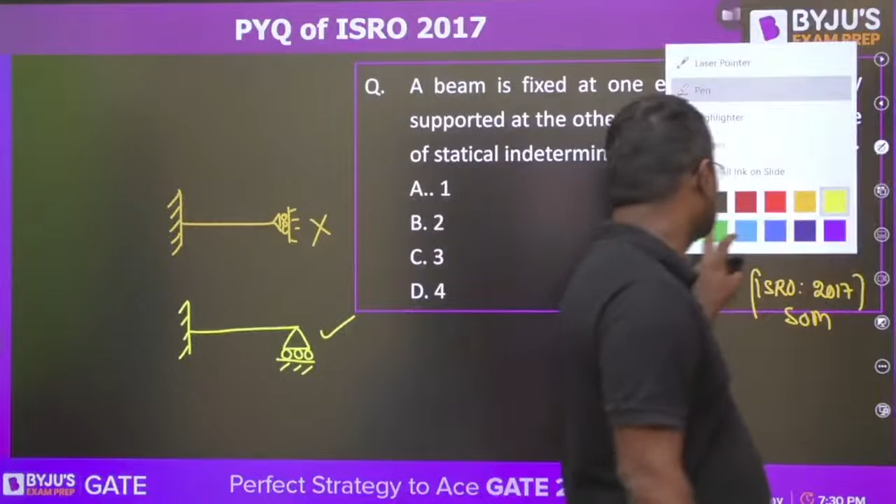So guys, what are the number of reactions here? One reaction is this, vertical. Fixed support can give horizontal and vertical reactions and it can provide moment also. This is vertically supported, so only vertical reaction. So in total there are 4 reactions. And we have 3 equilibrium conditions.

3 equilibrium conditions, that is summation Fx = 0, summation Fy = 0 and summation M = 0. 4 unknowns and 3 equations. बहुत नाइंसाफ है भाई. So it is not good. So we will be having 1 degree of indeterminacy: 4 unknowns and 3 equations.

Suppose there are 5 reactions and 3 conditions, then 2 degrees of indeterminacy. With 3 unknowns and 3 equations, nothing is indeterminate; everything we can determine. So this will be the one.

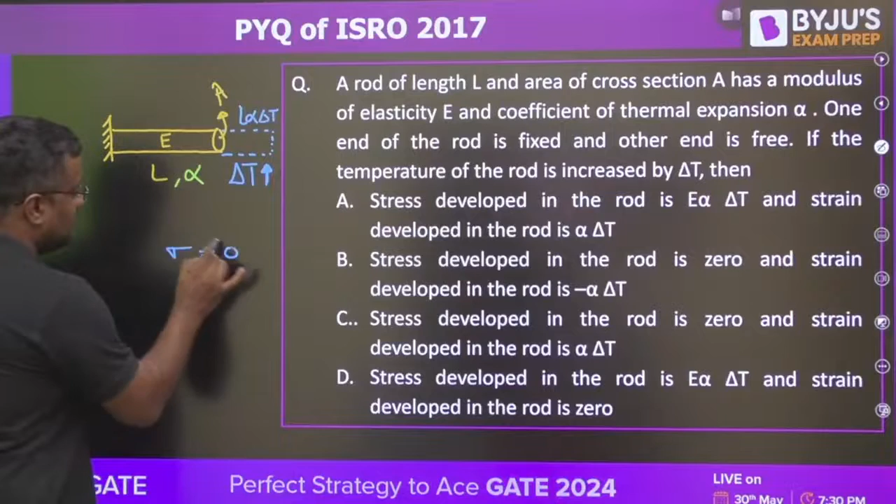Then the length increased is L alpha delta T. So, what will be the stress? Stress will be 0, because there will be no restraint. Nothing is restricting this. If it wants to increase, it can increase. There is no fixed support on the right hand side.

So stress will be 0 and strain will be delta by L. So L alpha delta T by L is equal to alpha delta T. Delta by L is alpha delta T. So stress will be 0 and strain developed is alpha delta T.

Okay. Now I want to show you something very interesting here. Everyone please see. Not this one. Cut it. New slide I want. Okay.

I want to show you something very interesting. I don't know how many of you know this. It can be asked in various examinations. So your screen is divided into 4 parts. One case, second case, third case. You are watching in mobile, laptop or anything, that is divided into 4 parts.

Now, guys, one case is this: sigma is equal to 0, strain is not equal to 0. One case is this: sigma is not equal to 0, strain is equal to 0. One case is sigma not 0, strain not 0. Tell me how many cases you know. If somebody asks this in objective exam or interview, how many of these 4 cases you know?

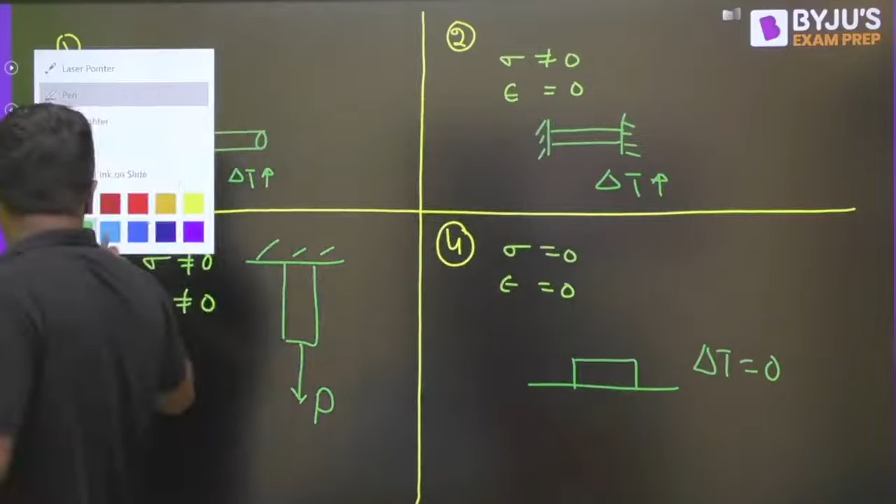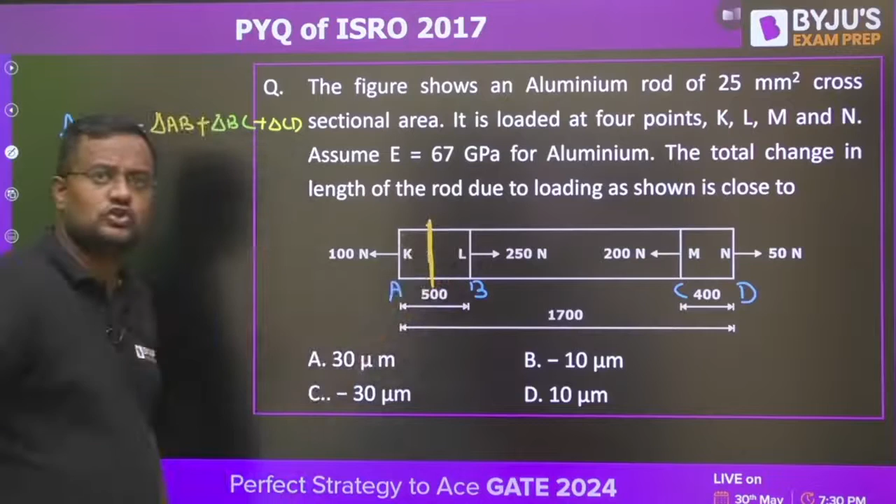Now delta AB, cut a cross section here. See from right or left, your choice. Let us see from left. From left, 100 is going away, so it is tension, it is positive.

From right also, cut a section here. 250 and 50, that's 300, positive, since the section going away is positive. This coming inside is negative. So plus 250 plus 50, because they are going away, plus 300, minus 200, it is again 100. So from left, 100 going away, plus 100, and from right also it is plus 100. So anywhere you see, it is 100 into length 500 upon AE.

Area and Young's modulus are given. I am just going into the concept, not the calculations.

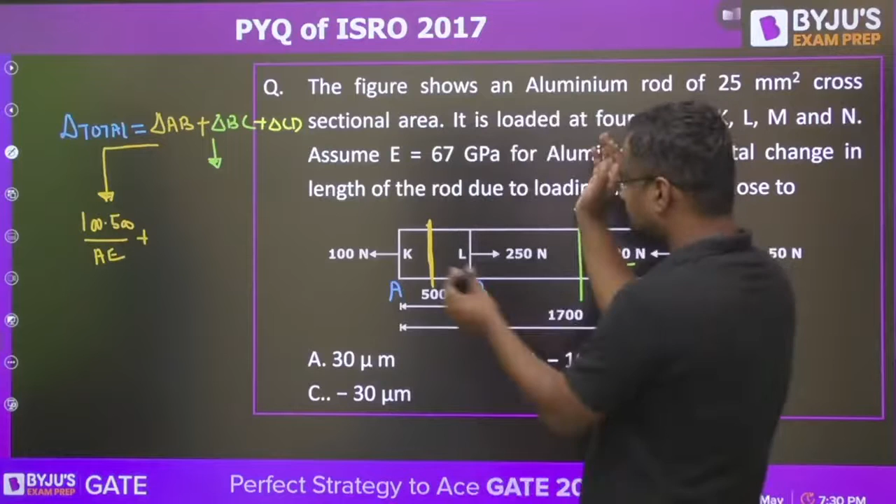Delta BC, cut a section here. See from right or left, your choice. See from right, 50 going away so plus 50, and 200 coming inside is minus. So net is plus 50 minus 200 is minus 150. Now see from left: going away plus, going away plus, coming inside minus. So plus 100 minus 250 from left hand side, plus 100 minus 250 is again minus 150. So delta BC is minus 150, whatever the length, upon AE.

Now delta CD, your choice, see from left or right. Let us see from right, going away, positive, so plus 50. From left also it will be same: going away so plus 100, coming inside so minus, plus 100 and minus 250 is minus 150, going away so plus, minus 150 plus 200 is again plus 50. So either you see from left or right, it will be same. So 50 into, just calculate in proper units, guys, C will be coming.

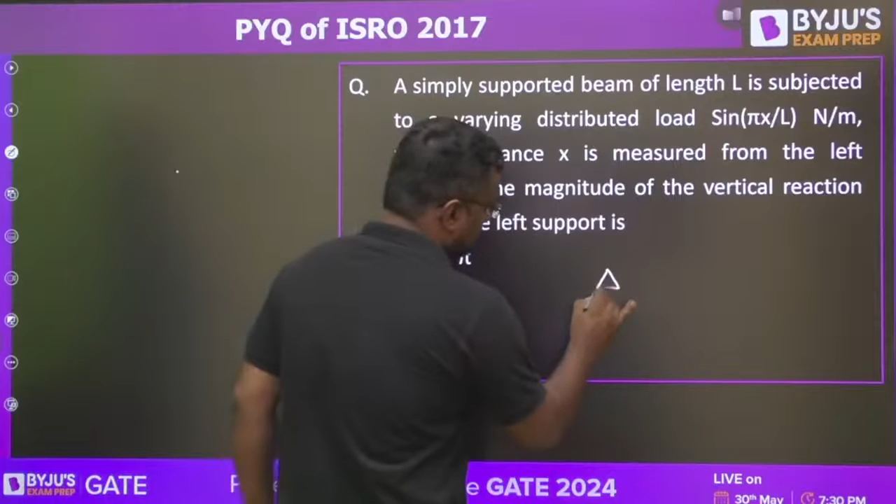What is here: a simply supported beam of length L is like this. Let me again make it. A simply supported beam of length L is like this. Let it be A, let it be B.

Now what is happening here is that the load is not UDL, not UVL, it is sinusoidal load: sin pi x by L. So W is equal to sin pi x by L.

So at x is equal to 0, sin 0 will be 0. So here x I am measuring from here, so x is equal to 0. Now at x is equal to L by 2, so L by 2 means sin pi by 2, which means 1. So it is maximum there.

And 0 to pi by 2 sine is positive, so upward loading, positive; we assume generally upward loading is positive or negative, same now, because only magnitude is in the options. Now at x is equal to L, it will be sin pi, that is 0, and 0 to pi sin is positive, meaning upward loading. Either way the sign convention is correct, because only magnitude is asked.

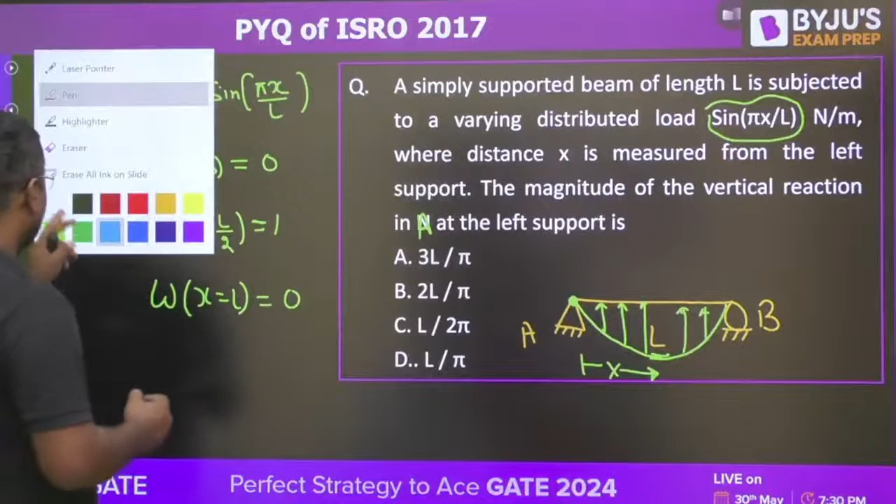Guys, since it is symmetrical, RA plus RB is equal to total load. Since the figure is symmetrical, therefore RA is equal to RB, so I can write RA plus RB as 2RA. So RA is equal to half of total load because it is symmetrical.

And what is total load? Area. So 0 to L, sin pi x by L dx. Okay, from here you can get this, whatever the answer is coming, D or whatever. Got it, everyone?

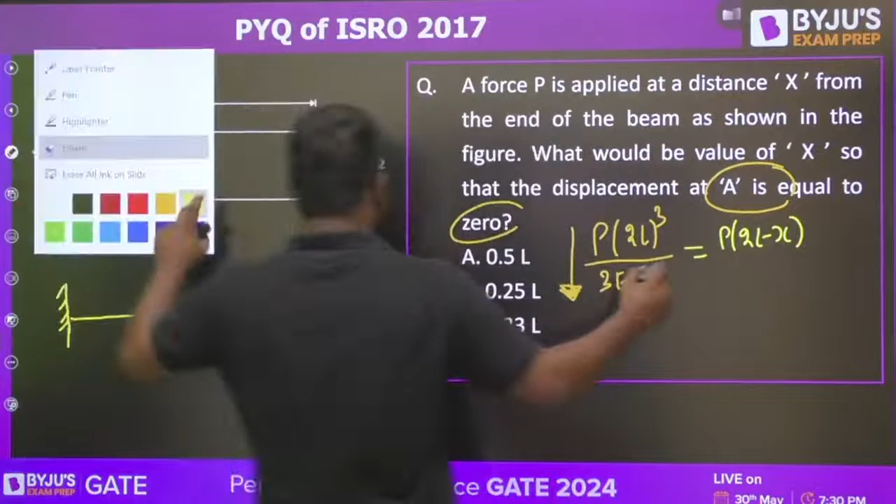This P is pushing it downward by that much, and this moment is pushing it upward. So the downward movement due to orange P and the upward movement due to yellow moment have to be equal. This is P into 2L minus x, M into L square, where L square is 4L square, so it becomes ML square by 2EI, giving 2x whole square by 2EI.

Now from here, this becomes 8P upon 3. EI is cancelled, but L cube is not fully cancelled - L square is cancelled, leaving L remaining.

Here it will be P by 2 into 2L minus x, which is 2L minus x into 2, giving 4L minus 2x. P is cancelled, so we get 16 by 3 into L is equal to 4L minus 2x.

From here, 2x is equal to 4L minus 16L by 3, so 2x is equal to 4L by 3, magnitude wise. So x is equal to 4 by 6, or 2 by 3. Please check if you're getting the same value.

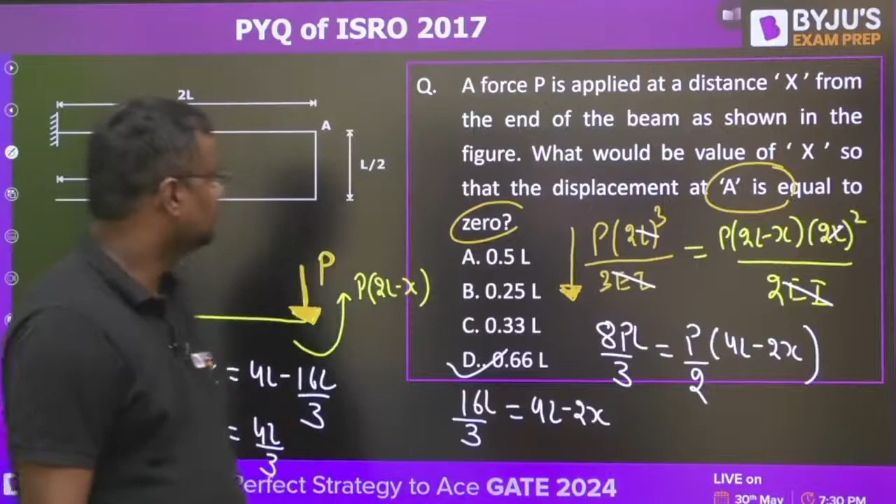Let me tell you that phi A minus phi C is equal to phi A, because phi C is 0 since C is fixed. This is phi AC or phi CA, and phi AC is equal to phi CB plus phi AB. So ultimately, theta A or phi A is equal to phi CB plus phi AB.

For phi CB, cut a section here. See, from right, torque is T. TL, L by 2 upon GIP, where GIP is pi by 32 into D to the power 4, 2D to the power 4, plus phi AB.

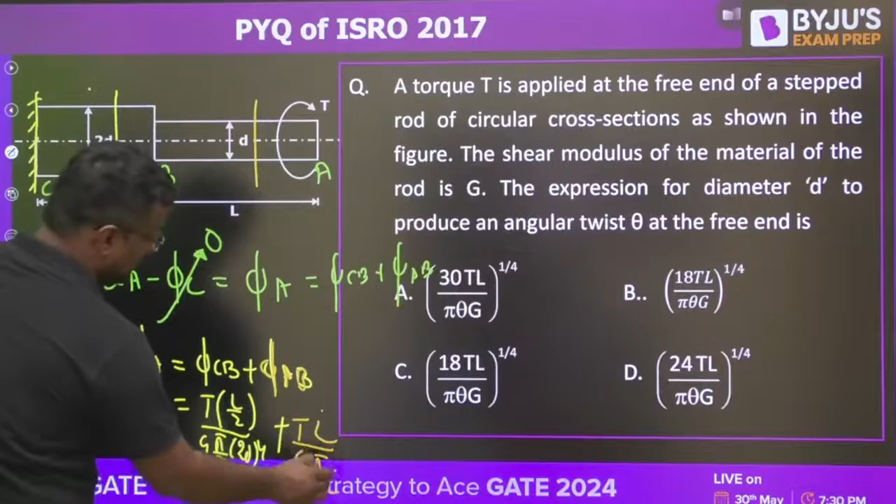Cut a section here. See from right, T, L upon GIP, where IP is pi by 32 into D to the power 4. From here, whatever calculation you do, you can get the answer. Check whether it's B or C, whatever answer comes. Please check, got it everyone?

Diameter is equal to 4 mm. What is the nearest yield stress and percent reduction in area? Percent reduction in area is purely an aptitude problem, so don't be afraid that we haven't studied this in SOM - just apply aptitude also sometimes.

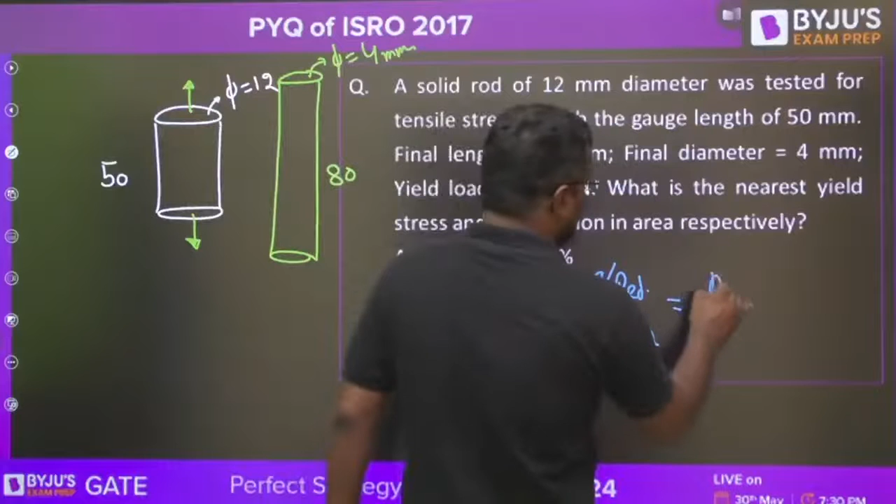So it is pi d square by 4. Earlier it is 12 square by 4 minus pi 4 square by 4 upon pi d square by 4, into 100, and that comes to be 90%. Accurately, if we calculate, it will be 89%.

Now, if I do this, yield stress is force by area, then yield load is 1130 Newton. So 1130 Newton upon area. Unless mentioned, we always work in engineering stress and strain, so it depends on original area: pi d square by 4, with d as 12, giving the area in mm square. Newton per mm square is megapascal, and this value comes to be 9.99, so roughly 10.

So C will be the option.

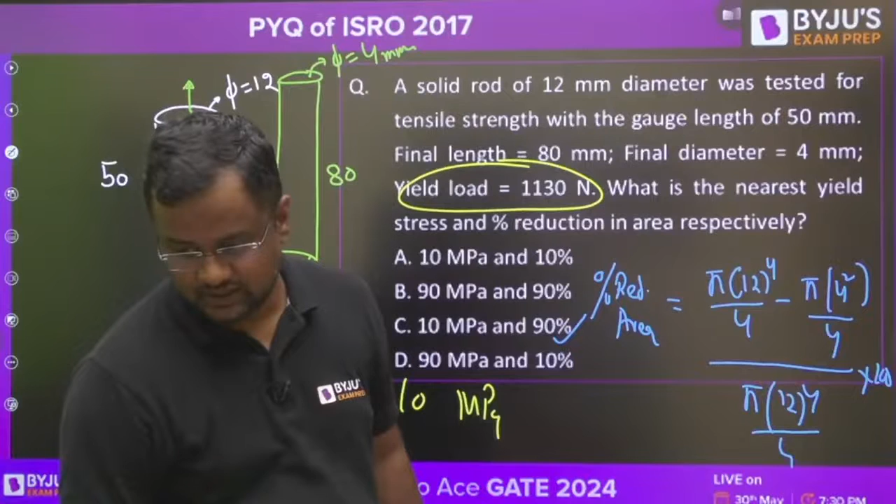Now guys, for perpendicular vectors, dot product is 0. A dot B equals 0 because A dot B is AB cos theta. If theta is 90, it will be 0. So 3 into P, because I will multiply by I, then only cos theta is 1. Otherwise I into J and I into K will be 0.

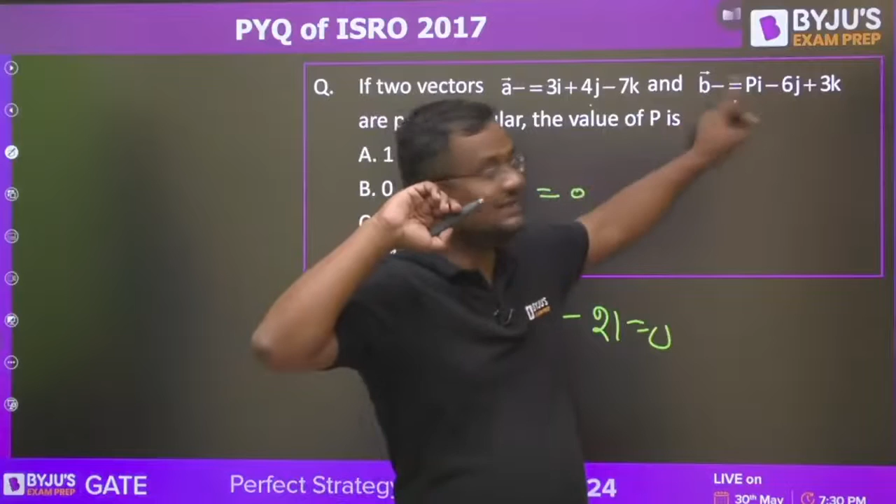I dot J, I dot K will be 0. Now 4J and 6J minus 24. J multiplication with I will be 0, cos 90 is 0, J multiplication with K is 0. Now K term is equal to 0. Again K will multiply only with 3, since K dot I is 0 and K dot J is also 0. So this gives 3P equal to 45, so P equal to 15.

So for the vectors to be perpendicular, the value of P has to be 15. For the dot product to be 0, it should be 15.

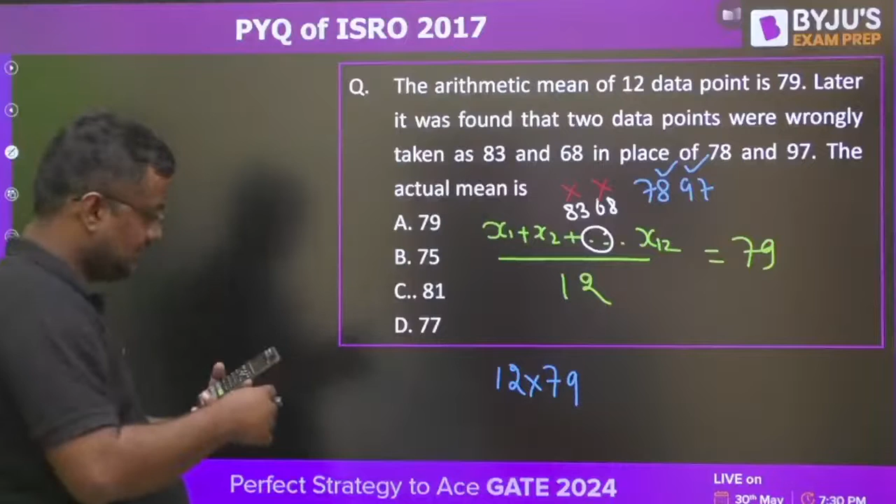But actually you have to subtract 83 and 68 from here, because that is not the actual sum, and instead you have to add 78 plus 97. Again there are 12 terms, so for 12 terms, we subtract 2 wrong terms and add 2 correct terms, then divide by 12 to get the average.

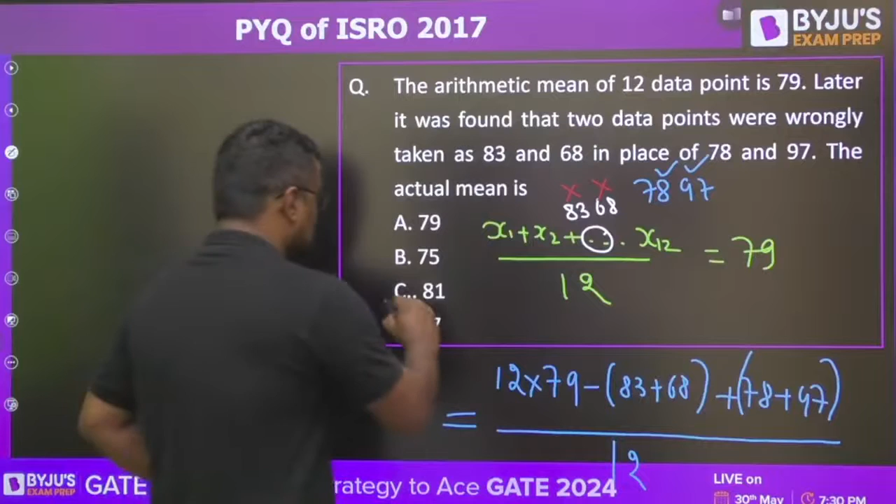Now let us see from my new calculator what is the value: 12 into 79, minus 83, minus 68, plus 78, plus 97, divided by 12, equals 81. So the C option is coming.

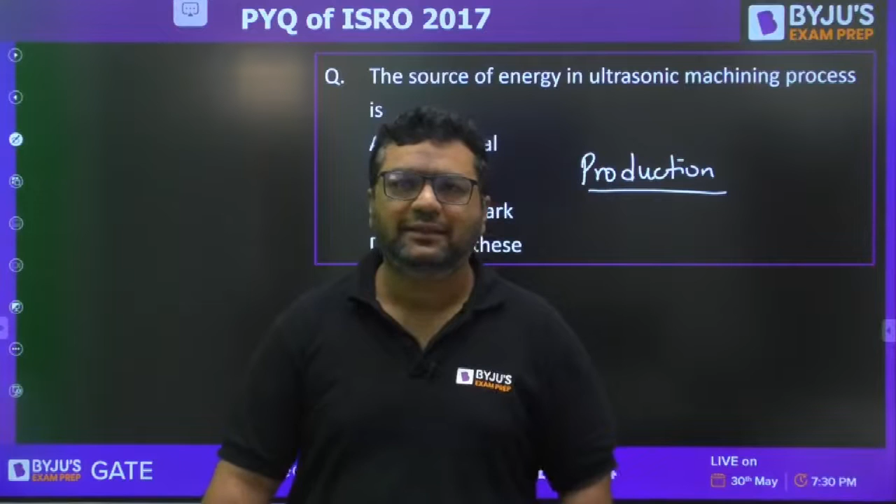Yes, everyone has given the right answer this time. Sanjay is saying A because whenever we are talking about USM, ultrasonic machining, a non-traditional machining method, we are going to use the energy of vibrations. So whenever we are going to use the vibrational energy, the answer will be mechanical. Is it clear? Very good, Payal, Sanjay. So moving to the next question, guys.

This is from theory of machines. Degree of freedom of spherical pair. Guys, this is a question where many people are giving the wrong explanation by showing you some wrong experiments. Don't go by that. They are trying to show spherical pair as rolling pair. It is wrong. Okay, so don't be part of such sessions. Okay, the answer will be 3.

Because in spherical pair, clearly you are having 3 directional rotation. I have always given you the example of this. 1st rotation, 2nd rotation, 3rd rotation. So the answer will be C. For spherical pair, we are having 3 dimensional rotation. So degree of freedom will be 3. Very good, guys. Moving further to the next question.

Actually, this is not from any subject. This is from engineering drawing. But sometimes ISRO asks some 3 to 4 questions which are beyond your mechanical syllabus, and they also mention that 75% of the paper will be from your branch, the rest 25% they can ask from here and there. Okay, so they are asking about the isometric projection of a sphere.

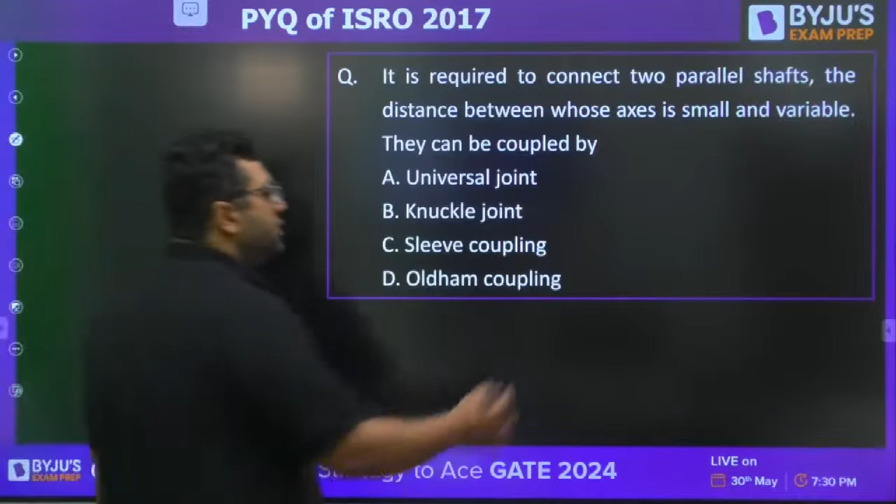So the answer for this is going to be parabola or hyperbola or ellipse or circle. Circle, yes. When you see the projection of a sphere, it would be a circle with a diameter equal to the sphere diameter. Very good, guys. Moving further, now we are having a question from machine design, or you can also call it TOM. Why? You will get to know after answering this. These are all ISRO PYQs. Very easy question they are asking.

Great, great. Jabir, if possible, connect with me after the class. Okay, connect with me after the class.

Sanjay is saying D is the answer. It is required to connect 2 parallel shafts, the distance between whose axes is small and variable. So I feel they are saying that if one axis of the shaft is this, the other is this, there is an offset between them. And this offset is said to be lateral misalignment. So if lateral misalignment is there, then my dear, we will say the answer is going to be Oldham coupling. Because Oldham coupling is used to join shafts with lateral misalignment.

Now you must be aware of others. When we are talking about the universal joint, it is used for angular misalignment. For angular misalignment, okay? And when we are talking about the sleeve coupling, it is similar to flange coupling to join the coaxial shaft. Okay? Is it clear? Yes, knuckle joint is used to join 2 members under the tensile forces. So answer will be D for this. So it is from theory of machine or machine design.

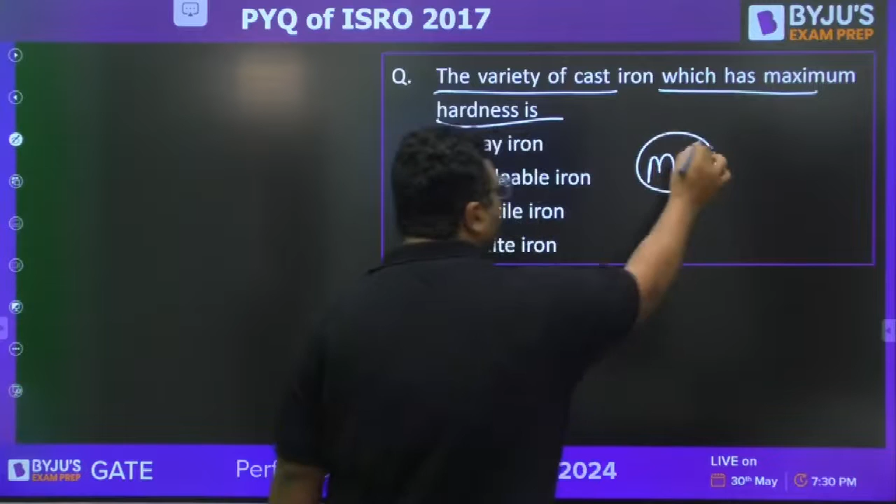Now they are talking about the variety of cast iron which has maximum hardness. This is from material science, ESE paper 1 part, where we study all the grades of cast iron. Yes, Sanjay is saying D. Very good. Sanjay is very well prepared for the exam. Very good, Payal. Answer is white iron.

Actually, whenever we are talking about the white iron and the gray iron, in the gray iron we are having the graphite flakes present. So guys, whenever we are talking about the white iron, it will be having the most hardness because it will be having the carbon present in the hard form. So that's why answer will be D for this.

Now once again, theory of machines, my dear, Kutzbach equation. I feel very easy for all of you. So you can see the question level is not at all difficult. That's why at that time they were giving you 80 questions in 90 minutes, a 1.5 hour paper. This time the pattern is going to change. So after PYQs, we will be coming up with the mock test, and mock test will be according to the exam level. So be ready for that.

Very good. Sanjay is saying C. So you know that degree of freedom by Kutzbach equation is 3(L minus 1) minus 2J minus H. So according to that, C option is correct. Okay, very good, Sanjay. C option will be correct. Very good, Payal.

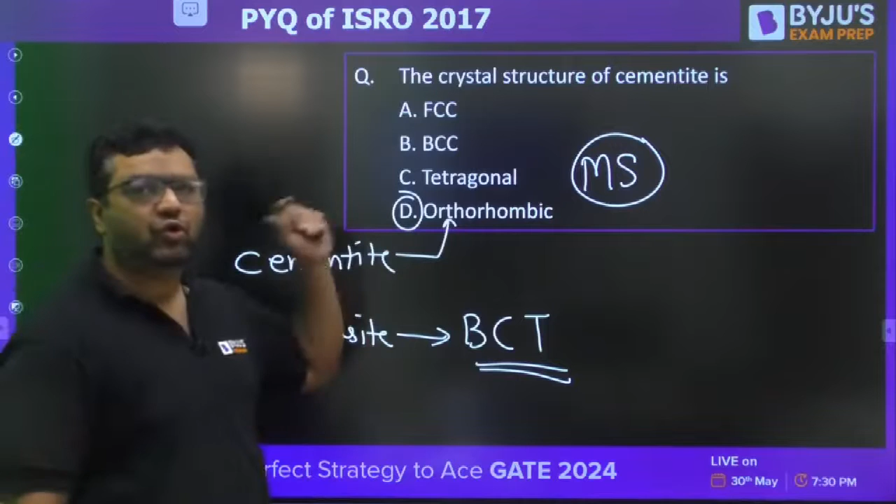Here I would like to say there is a confusion between two words for students: cementite, martensite. When we are talking about the cementite, no doubt this structure is orthorhombic. And for martensite, it is body centered tetragonal. So martensite is having BCT structure, cementite is orthorhombic. Why am I telling both? Because maybe in the next paper they ask the second one. So be ready for that. Moving to the next question, guys.

This is once again from the material science heat treatment process. You can see the weightage of material science is more than production technology in this ISRO paper. That happens only in two papers, ISRO and engineering services. In all other papers, material science weightage is very less in general. That's why I say ISRO follows the pattern of ESE.

Okay. So Sanjay is saying D is the answer. So yes, in terms of hardness, furnace cooling gives you the least hardness. Then you will get in air, then in oil, and then in water. So water quenching will give you the highest hardness. D is the right answer for this.

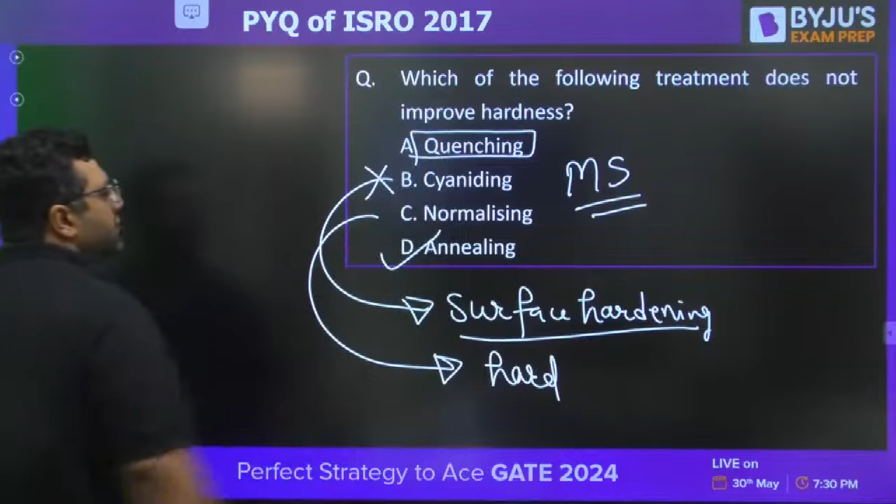In annealing, we improve properties like ductility, toughness, and stress relieving. That's why in annealing, hardness is not improved. Because hardness and brittleness go together. Strength and ductility go together. So here ductility is increased, toughness is increased, hardness is decreased. Moving to the next question.

Now, theory of machines, governors. They're asking you the ratio of the height. So, height in which governor? Porter. To the height in what? Here, small m is the mass of fly ball, capital M is the mass of sleeve. What would be the answer, guys? Sanjay is saying C, Pagelward is saying C.

Why are other students not answering? Other students are just watching the session. Answer it. You can give a wrong answer, but you must answer it.

So I would like to say the answer is going to be C. Because you know in the Porter governor, you are having this term, M plus m divided by m, like that. And in the Watt governor, you are having 895 by N square. And in the bracket, you are having this type of term. So that is why here there is no term of mass. Here only the mass terms are there.

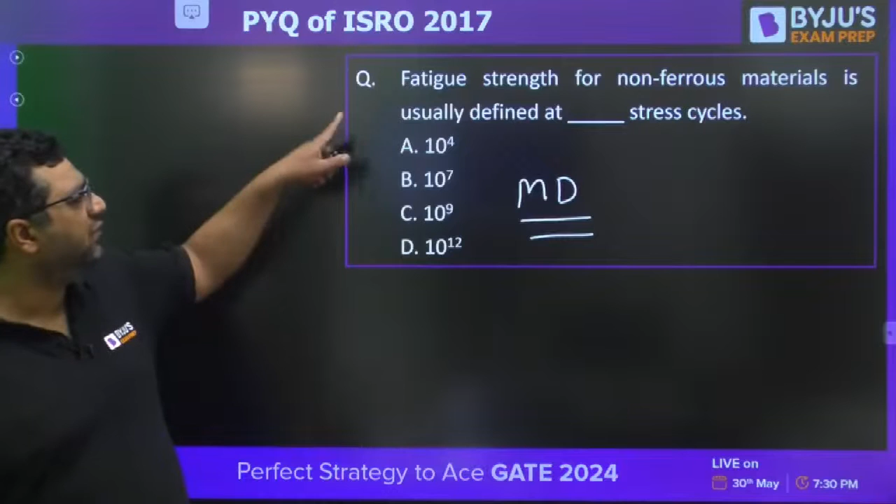Fatigue loading case. They're asking you the fatigue strength for non-ferrous material is usually defined at how many stress cycles. So what would be the answer? If you remember, for mild steel, I have shown you, we make it like this. This is for mild steel. This is for aluminium, copper, magnesium. But they are asking up to which value on the x-axis it goes for non-ferrous material.

Sanjay is saying B, Jahid is saying B, Pagelward is saying C. My answer is B. For non-ferrous material, always remember it goes till 10 to the power 7. For mild steel, it goes till 10 to the power 6. Okay, moving further guys.

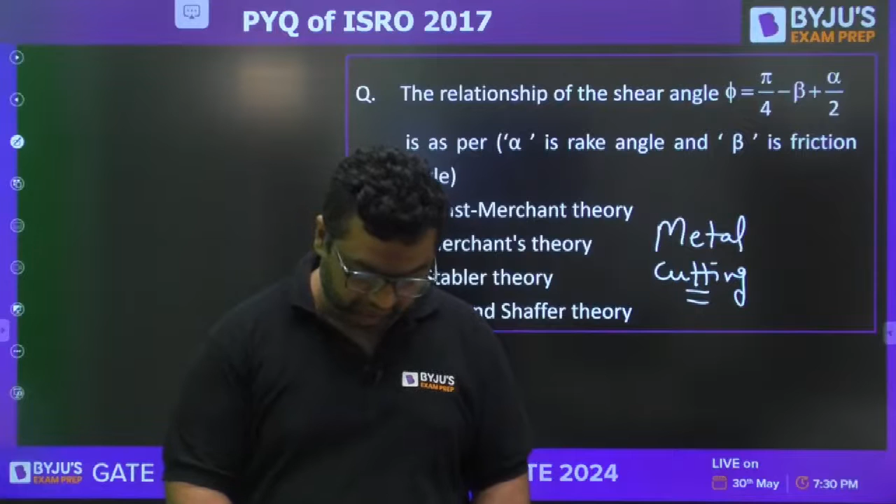So this is from production, metal cutting. Try to solve it. What would be the answer here? Very good. Sanjay is saying C. Ashish is saying D.

Lee and Shaffer theory. So dear, I would like to say that 2 phi plus beta minus alpha is pi by 2. Here they are asking what is the relation. So when you find out phi, it will be pi by 4 minus beta by 2 plus alpha by 2. This is from Ernst Merchant theory. So if this relation is used, then the answer will be this.

When we are talking about the Stabler theory, for Stabler theory, we are going to have phi plus beta minus alpha by 2 is equal to pi by 4. This is the Stabler relation. From here you can write phi is equal to pi by 4 minus beta plus alpha by 2. So the answer for that is the Stabler theory. C is the right answer.

Okay. So I feel everybody got it. Dinesh, very good Dinesh. Moving further guys, next question. I am telling you this is also a very important question. It is repeated at least 5 times in ISRO. Only the difference is sometimes they put the theory name here and ask the relation in the option. So always remember these three: Merchant, Stabler, Lee and Shaffer. Remember these relations.

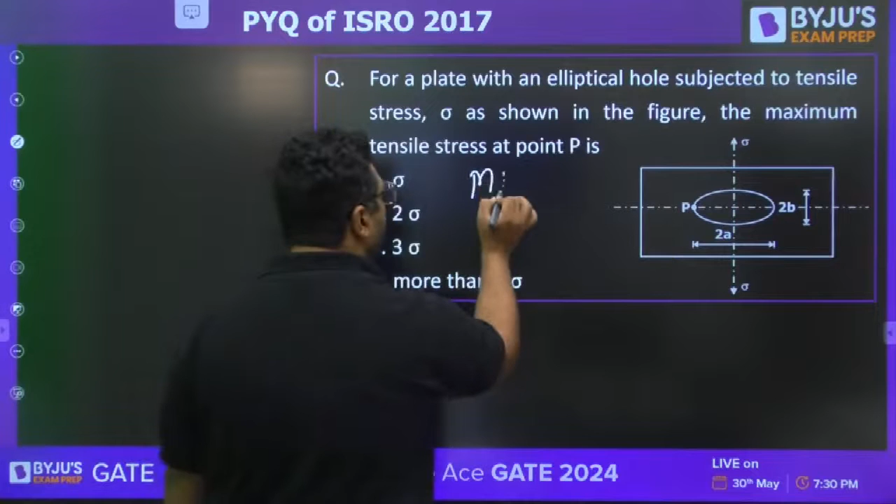Okay, moving further guys. This is once again from the machine design fatigue loading chapter. In this paper, weightage of machine design was quite high. If we have seen the previous 2 papers, which were recent, their machine design weightage was lesser. But if you see, the topics are fixed, they're asking on similar topics every year. They're not changing the topic.

Okay, solve this question. For a plate with an elliptical hole subjected to tensile stress sigma as shown in the figure, the maximum tensile stress at point P is. This is the point P they have marked. What would be the answer for this? Okay, Sanjay is saying 3 sigma. What about others?

So I feel everybody knows that for an elliptical hole, with loading applied in this direction, we can write KT is 1 plus 2A by B. Is it clear? Can you tell me 2A or 2B, which one is bigger from the figure? Can you identify? Sanjay, Dinesh, Jahid, Ashish?

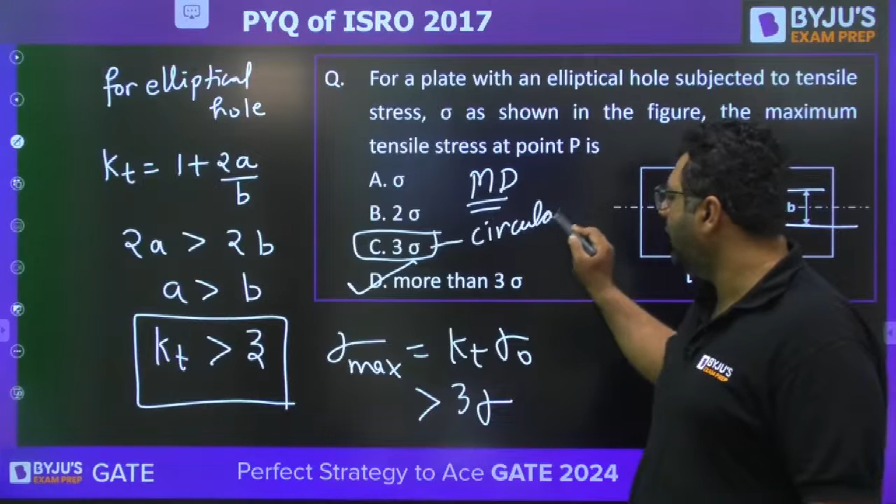And I know that generally students will say 3 sigma, but 3 sigma is coming for the circular hole. So the answer for this is D. I feel this is the only question till now which you guys have given wrong. None of you have given the right answer. For all other questions someone was giving the right answer, most probably Sanjay.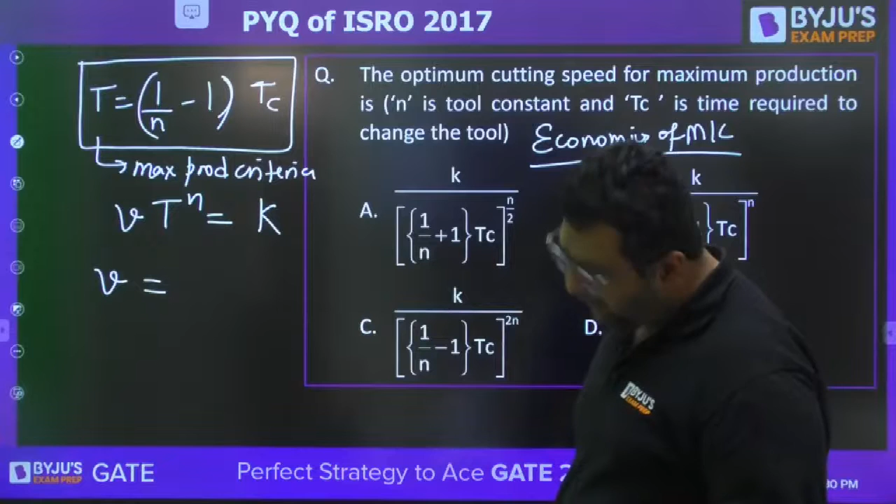So you know V T to the power n is equal to K. So you need to answer what is the value of the optimum cutting speed. What is the value of V? This is for maximum production criteria. Sanjay has said B. What about others? You can write it as K by T to the power n, that is K by (1 by n minus 1 into Tc) to the power n.

So the answer for this is no doubt B. B is the right answer. So you need to remember these relations. This is for maximum production criteria. Similarly, there was a relation for minimum cost criteria. Fine. Moving further, this is from tool signature.

Tool signature. You need to tell about the side relief angle. I feel everybody knows that rake, relief and cutting edge: I told you angles come in this sequence, and always remember side comes later. So first there would be two rake angles, back rake, side rake, then end relief, side relief, then end cutting edge, side cutting edge. So the answer for this is the side relief angle.

So side relief angle, what will be the answer? Very good, Jahid. It is going to be the fourth term. This is first, second, third, fourth, fifth, sixth. Fourth term is this. And also you can see the second last term is less than 30. So it is ASA. If it is more than 30, do you remember that now? Yes, it is ASA, American Standard Association.

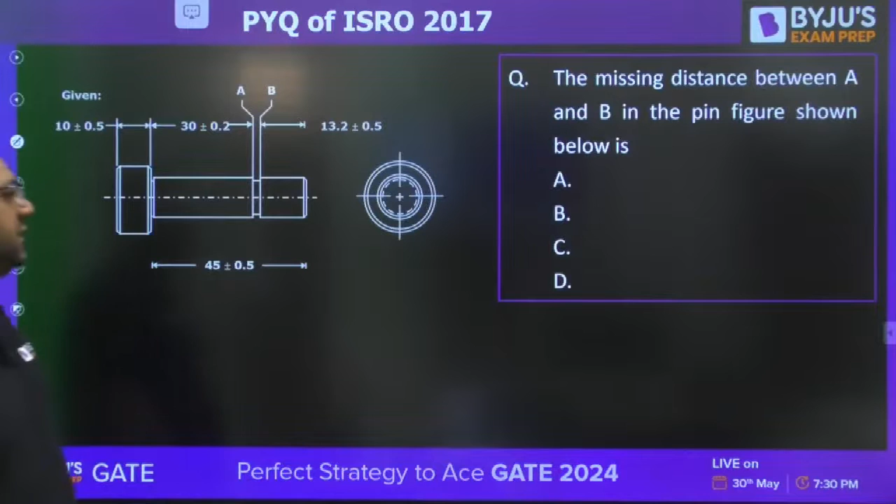Moving further, guys. For this question, actually the options are missing, so I am writing them. This is from metrology, limits, fits and tolerance. Option A is 1.8. Option B is 1.8 plus minus 1.1. Option C is 1.8 plus minus 1.2. Option D is 1.8 plus minus 1.3.

This is a question from tolerance sink. Okay, you would be remembering that tolerance sink concept.

So let us see, sir, from where should we prepare for the allied subject? Ram Yadav, whenever they say allied subject, it is very difficult for you guys to identify separately. But I am telling you, for that you need to prepare RAC, IC engine, and power plant as per the ESE syllabus. It will cover 3 branches of allied subjects, and you can have some basic ideas about automobiles. But if you prepare IC engine, RAC, and power plant as per the ESE syllabus, out of 25% of allied subject questions, 20% will be covered here. For the rest 5%, there is no limit — they can ask from automobiles, engineering design, engineering drawing, okay? Allied means nearby areas.

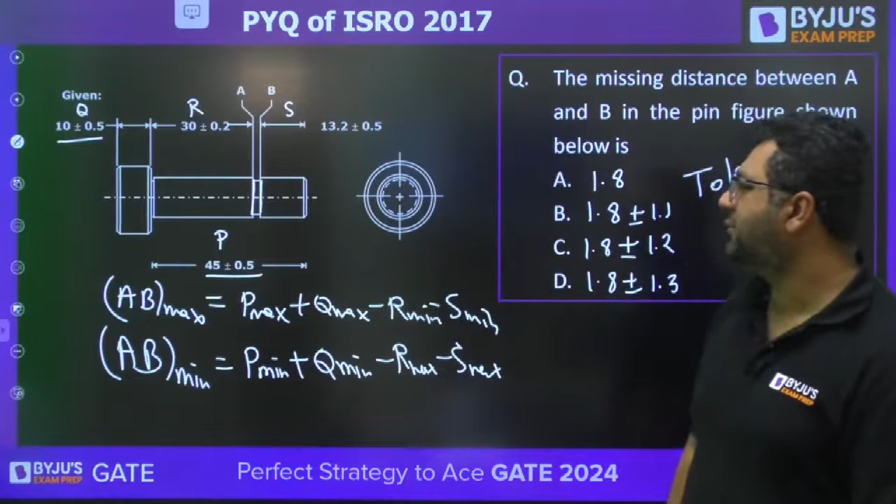What will be the answer, guys? So when we say P maximum, 45.5, Q maximum 10.5, then minus 28.8, 29.8, and 13 will become 12.7. So you can find out these two sizes, that will give you the right answer.

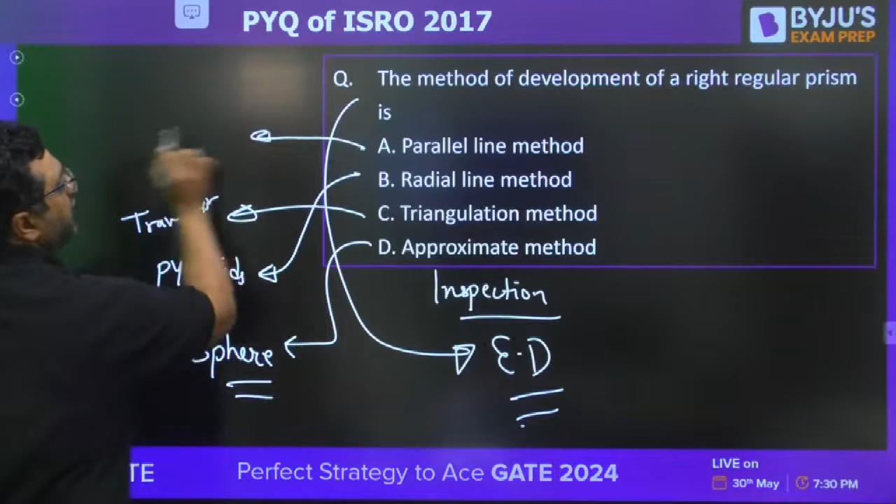So radial line method is used for making pyramids. Triangulation method is used for transition pieces. Parallel line method is used for right regular prisms. I just told you this because if it is repeated, you must be in a position to answer it. So the answer for this is A.

Otherwise, no need to refer to anything for these questions. No one will be knowing that. Okay? No one will be knowing that.

This is from welding now — actually no, material science. Below the ductile to brittle transition temperature, weld joints show... this is about ductile to brittle transition.

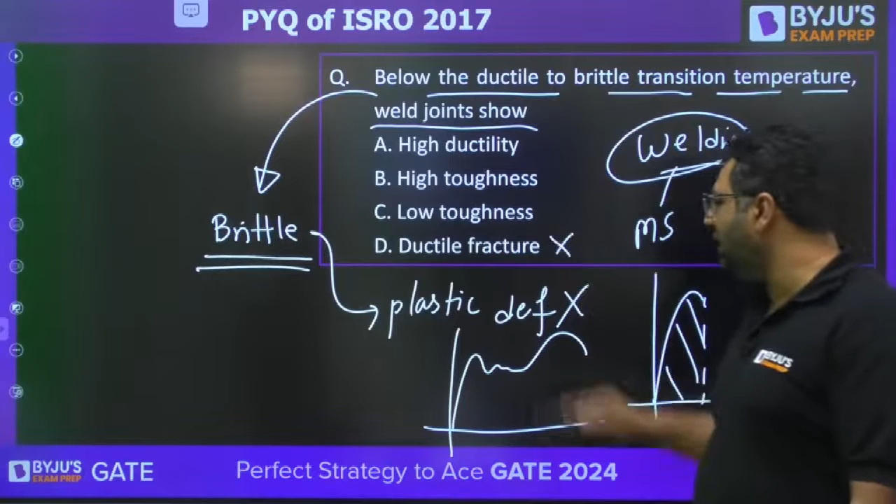I would like to say that below this material is brittle. Now you can answer which property it will have. Okay, Sanjay is saying C, very good, because whenever a material is brittle, it will not show any plastic deformation. So when plastic deformation is not there, the stress strain diagram for mild steel comes like this, whereas for other steels it comes like this. So obviously the area will be lesser, so no ductile fracture, no high toughness, no high ductility. Answer will be low toughness. C will be the right answer for this question, guys.

Okay, moving further guys to the next question. This is from casting, non-conventional casting process. I feel after that I will be taking 7-8 more questions. Then Chandra sir would be coming for thermal and fluid part, then Suraj sir would be coming for engineering mechanics, industrial engineering and heat transfer.

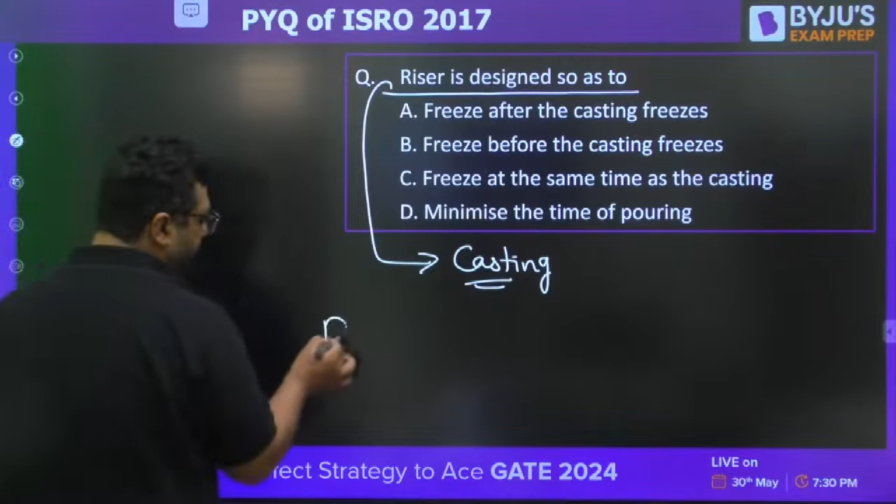Today you got late. Riser is designed so as to... question from casting. Sanjay, Arnab, Jahid, Pejal, Ashish is saying A. So when we are talking about the riser, riser is there to provide the molten metal for the first two stages of shrinkages. So first stage is liquid shrinkage, other is solidification shrinkage. So if it will solidify before casting, it will not be able to provide molten metal. That's why riser must solidify after the casting. So Sanjay, Dinesh, Arnab, Ashish and Sanjay have given the right answer. A will be the right answer. Freeze after the casting freezes.

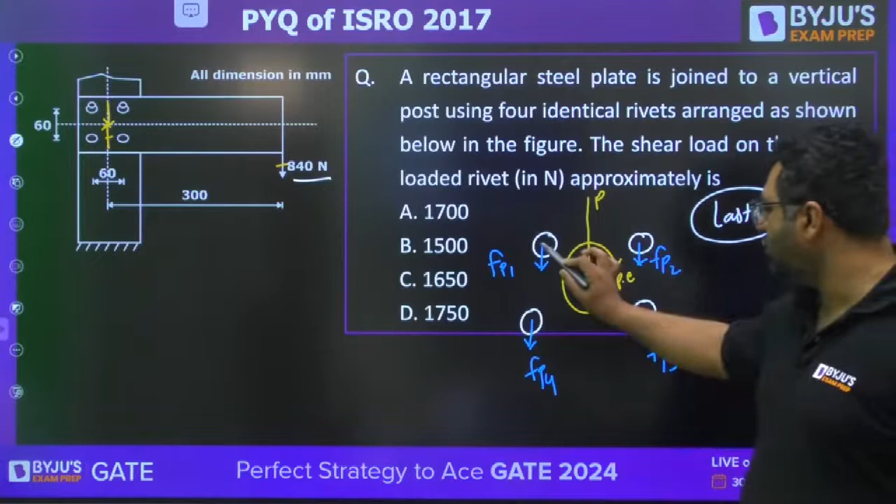Then secondary force will be coming out like this. To find out secondary force, I feel you have the idea how to do this. For secondary force, I am doing it directly because in ISRO only those candidates are appearing who have given GATE, so you already are aware of how to do the things. It is P into E into R, with R1 square, R2 square, R3 square, R4 square. Because of symmetry, all these four are equal, so you will be getting the value of secondary forces.

All secondary forces will come equal, and if you want the values, primary force is 210 Newton in every nut and bolt. Secondary force will be coming 1484 — always the couple gives more effect. Then you will find out the resultant. For the resultant, you need to find the angle between these two. In these two rivets or bolts, they are near to the load, that's why they will be the critically loaded rivets.

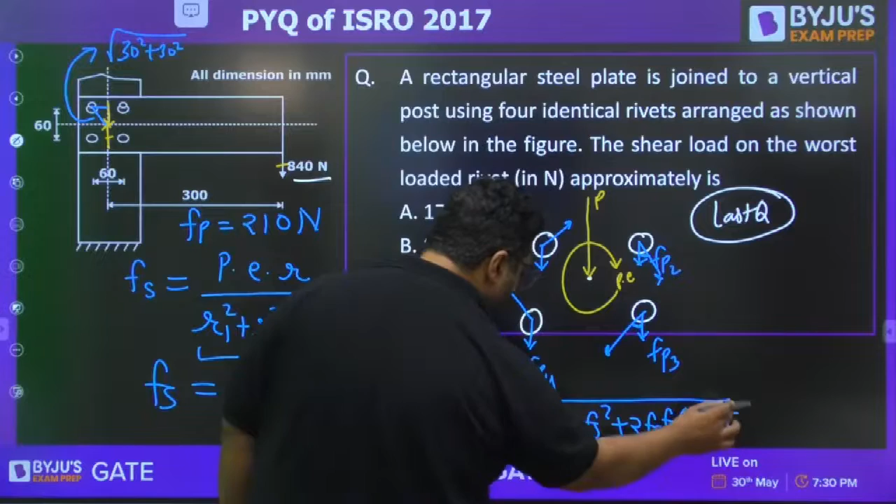Okay, very good Sanjay, the primary value of 210 is correct. Is the secondary value correct? Have you checked this? This distance is 60, and this is also 60, so when you find out this distance, it is going to be by Pythagoras: 30 square plus 30 square. The angle will be 45. So it is F primary square plus F secondary square plus 2 times F primary times F secondary cos 45. Solving this, you will get the resultant force coming out to be 1648.

So this was a lengthy question. This type of question you must attempt at the last. They are asking you the shear load on the worst loaded rivet, so I feel the answer for this is near to 1650. C will be the right answer. Everybody got it? Please tell me that.

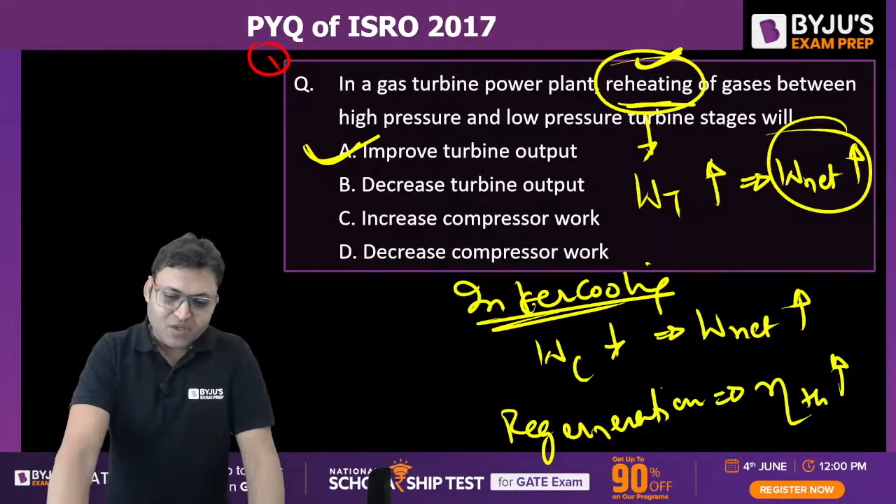Is this all fine? Yes, Ashish, Sanjay, well done. What about others? Why are you guys not responding? Jahid, Arnab, even if you commit a mistake, it is not a crime, but you should be ready to accept your mistakes and try to work upon those weak areas. That is how improvement happens. It is a gradual process. So do not feel disappointed even if you are not getting the right answer. We are there to help you out in every possible way.

If you draw a psychrometric chart, the process is cooling and dehumidification. Can we call it cooling plus dehumidification? The process is cooling and dehumidification. So if we draw the psychrometric chart, on the y-axis is specific humidity, on the x-axis there is dry bulb temperature. Cooling means temperature decreases and dehumidification means specific humidity will also decrease.

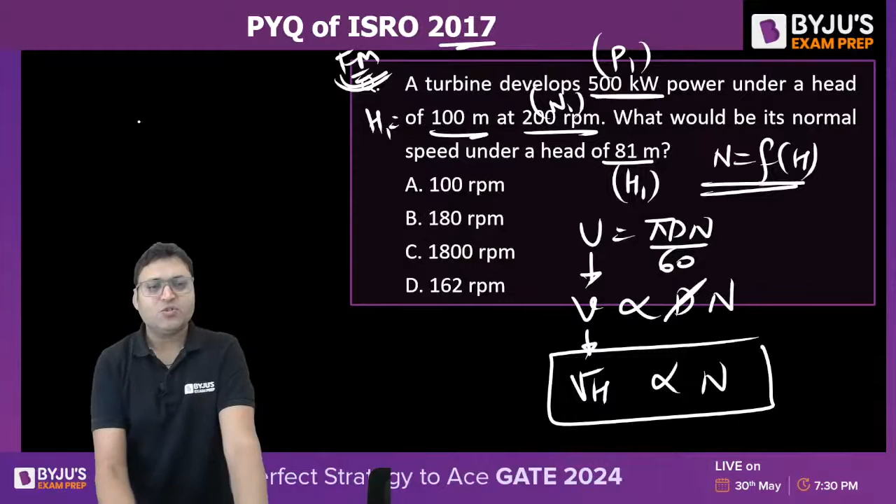So we can say U is equal to pi DN by 60, the blade speed, and U is directly proportional to D into N. D is constant, and V is proportional to root H, which is directly proportional to N. So we can say N2 by N1 is equal to under root of H2 by H1. So we can find out the value of N2. This type of question was asked in the 2018 paper also.

What is N2? N2 is 200 into under root of H2 by H1, 81 divided by 100. So it is 200 into 9 by 10. So it will be 20 into 9, 180 RPM. B is the answer for this one. Yes, Sanjay. Well done. What about others? 180 RPM is the correct answer.

This is an important question for your ISRO exam. These types of questions are important where you need to develop a relationship based on the given condition. A relationship may be correct in a particular condition or situation; it may not be correct in another situation. So you should be able to develop the relationship fresh for the given condition. Diameter is constant because it is a single turbine, right?

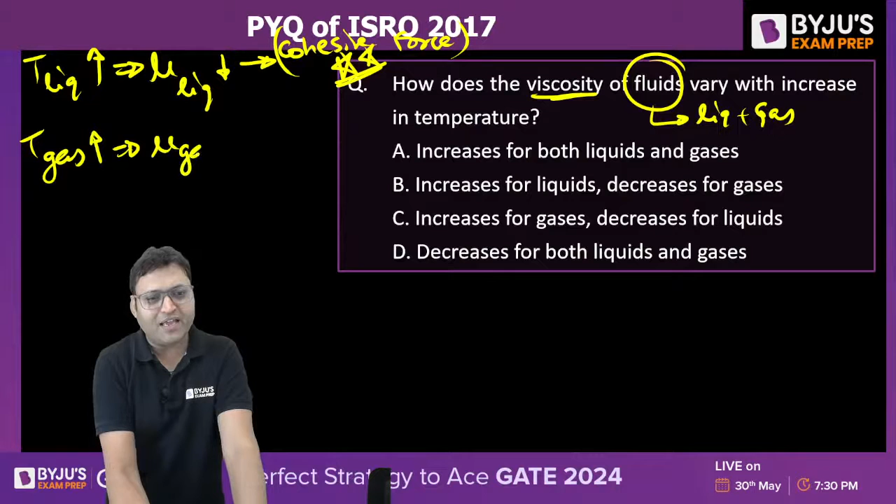And in case of a gas, as the temperature of the gas increases, viscosity of the gas will also increase because of molecular collision. Because of different dominating parameters for liquid and gas, there will be different variation of viscosity with temperature. More is the temperature of the gas, more will be the molecular collision, so viscosity will increase. And in case of liquid, more the temperature, cohesive force will decrease. The molecules move away from each other, so the viscosity of the liquid will decrease. So we can say it will increase for the gas and decrease for the liquid.

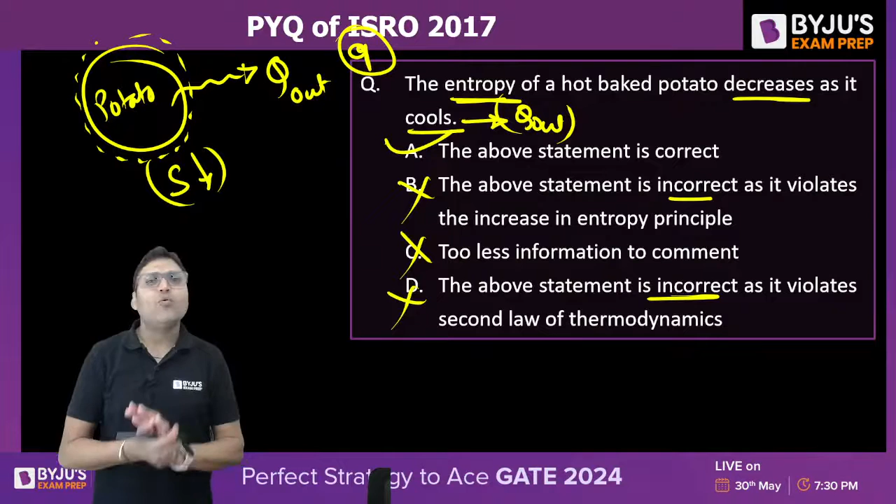So the statement is definitely correct. When heat is added to the system, it increases the entropy of the system. When heat is rejected from the system, it always decreases the entropy of the system.

So we will check: if the actual efficiency is less than the reversible efficiency, then the claim is true, then it is possible. Is less than thermal efficiency of a reversible cycle, then it is possible. If equal to thermal efficiency of a reversible cycle, then it is possible and reversible cycle. And if it is greater than thermal efficiency of a reversible cycle, then the cycle is impossible.

So what we will do is we will find out the thermal efficiency if it would have been a reversible cycle. That is 1 minus T2 by T1. What is T2? So T2 is equal to 273 minus 6, and T1 is 273 plus 27. What is the thermal efficiency of a reversible cycle? 1 minus 267 by 300.

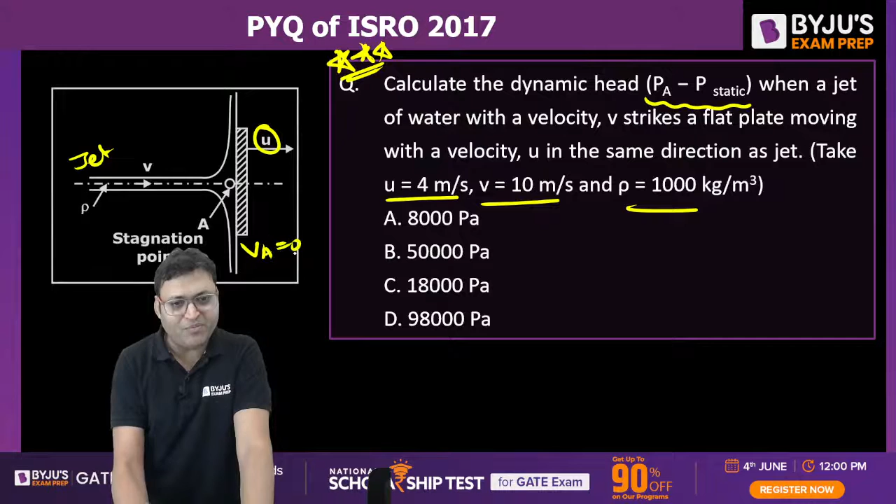So we need to find out the dynamic head. Point A is the stagnation point. VA will be equal to 0. And this is taken as point 1. So P1 is equal to P static pressure. V1 is equal to relative velocity V minus U. If we apply the Bernoulli equation, we need to apply it sitting on the moving plate, to make the flow steady. Once you sit on the moving plate, then the relative velocity comes into picture.

So we will write P1 by rho g plus Z1 plus V1 square by 2g is equal to PA by rho g plus ZA plus VA square by 2g. All should be relative velocity, and the relative velocity of point A with respect to the moving plate will be 0. ZA and Z1 are on the same horizontal plane, getting cancelled out, and P1 is the static pressure at point 1. So we can say PA minus P static is equal to rho into VR square by 2.

So we can easily find out. Density is 10 to the power 3. What is the relative velocity V minus U? That is 10 minus 4, square, by 2. So in Pascal, it will be 1000 into 6 square, 36 by 2. So it will be 18,000 Pascal, option C. It is about the relative velocity.

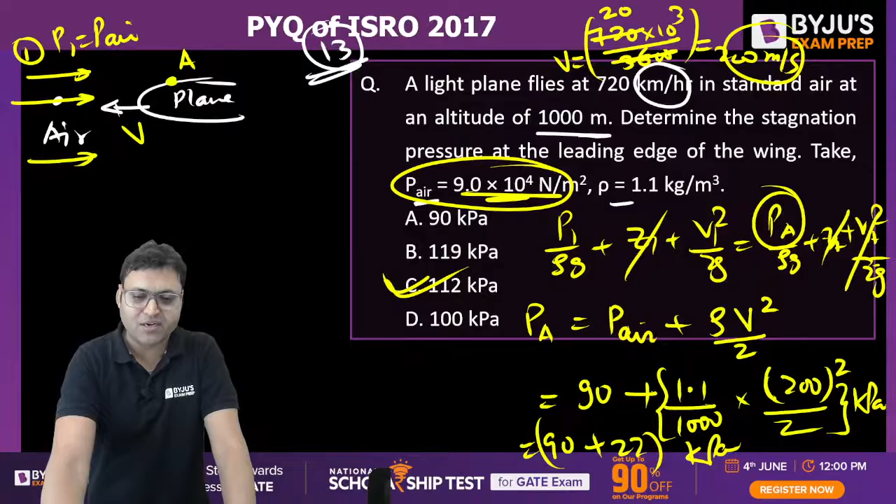The question is similar to the previous question, right? It is very much similar to the previous question. Let us move to the next one. Now the questions are more numerical based.

So stagnation, the question is from compressible flow. T naught, the stagnation temperature, is given by T plus V square by 2 Cp, where V is the velocity. This is the formula. T is known to us. What is this temperature T?

This is 273 minus 27, that is 246 Kelvin, isn't it? The value of T is 246 Kelvin. Cp is already given. The problem is with V.

Mach number is equal to V by C, which is equal to 10. We can find out V, but for that we need to find C, where C is equal to under root of gamma RT. And what is gamma? Gamma is Cp by Cv, that is Cp upon Cp minus R. Can we write this? So first of all, find out gamma.

Cp is 840, R is 140. So gamma is equal to 840 upon 840 minus 140, so it will be 840 upon 700. What is the value of 840 upon 700? Are you getting 1.2? Gamma is equal to 1.2, the value of gamma will be 1.2.

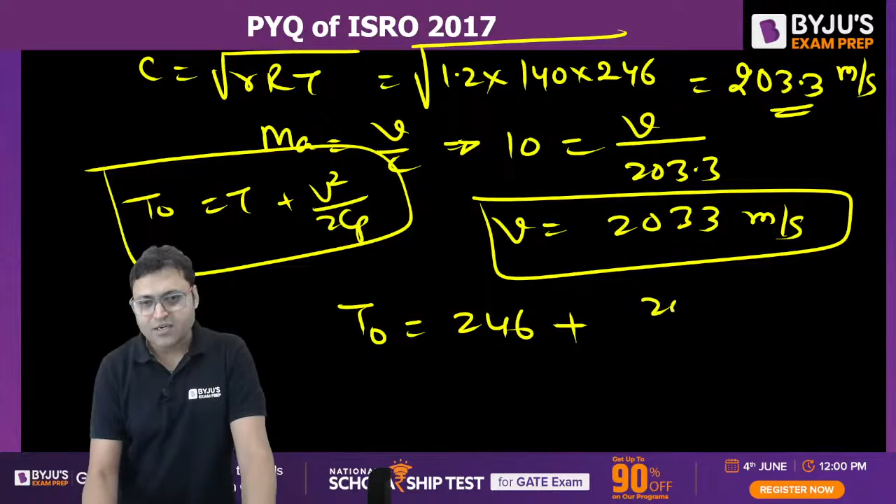Once you get V, then T naught is equal to T plus V square upon 2 Cp, that is 246. Put the value 246, 2033 square, it is a lengthy question, 2 into 840. If you do the calculation, T naught will come out to be 2706 Kelvin.

2706 Kelvin, or in degrees Celsius it will be 2433. This is the stagnation temperature, 2706 Kelvin or 2433 degrees Celsius. It is a very complicated question, so the nearest option is option C, but it is not the correct answer. No option is given in the question that is correct. We can say no option is correct for this one.

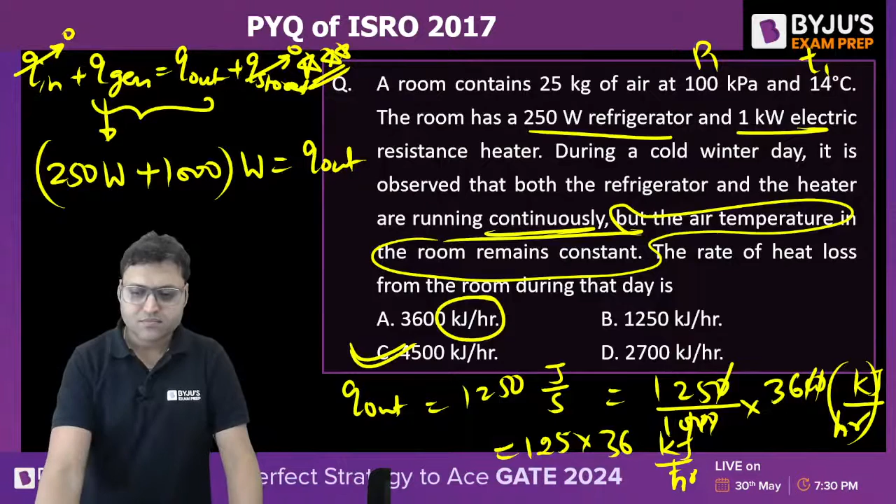The next question, second last from my end. I'll take 2 to 5 more minutes. Two Carnot heat engines are operating in series such that the heat sink of the first engine serves as the heat source for the second one. If the source temperature of the first engine is 1327, let us say T1, and the sink temperature of the second engine, let us say T2, is 127 degrees Celsius, and the thermal efficiency of both engines are same, the temperature of the intermediate reservoir T will be how much?

So if we draw the diagram: this is T1, 1327 degrees Celsius, then there is engine E1, this is Q1, this is Q2. Then the intermediate temperature T needs to be calculated. Then Q2 goes into engine 2, then Q3, and this is temperature T2, which is 127 degrees Celsius. The thermal efficiency of both engines are same. This is the diagram, and we need to find T.

So T1 in Kelvin: what is the value? 1327 plus 273, it will be 1600 Kelvin, isn't it? And what is the value of T2? 127 plus 273 equals 400 Kelvin.

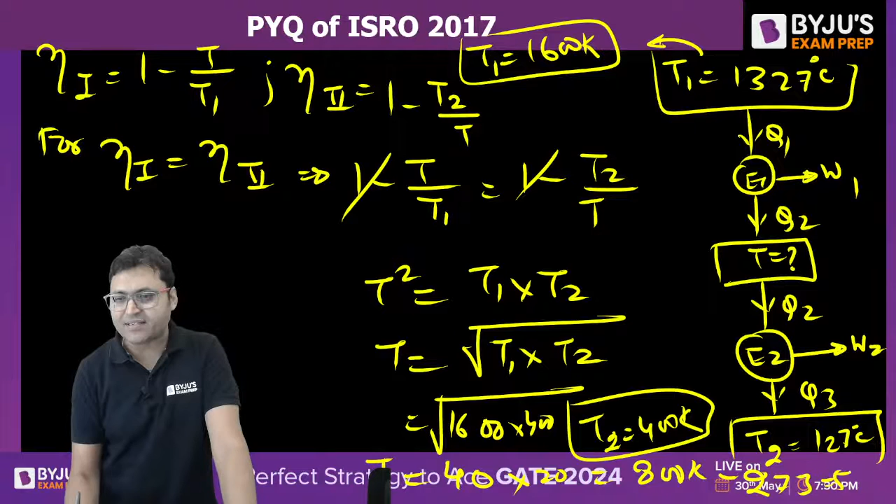Put the values: under root of 1600 into 400. So T will be equal to... it is 800 Kelvin, isn't it? Sorry, 800 Kelvin, it will be 800 Kelvin. So the value of T is 800 Kelvin, or in degrees Celsius you subtract 273, giving 527 degrees Celsius. Option D is the right answer for this one.

And the last question, which is beautiful, very interesting and conceptual, from fluid mechanics about the Bernoulli principle or mass conservation. Water flows into the top of an open drum at a constant mass flow rate. Water exits through a pipe near the base with a mass flow rate proportional to the height of the liquid. If the drum is initially empty, which of the following gives the plot of liquid height with time? Read the question carefully and let me know the answer.

Yes. Look, there is a tank. The mass flow rate entering is constant, let me call it 100. And mass flow rate leaving is directly proportional to H, isn't it? So what is the mass accumulation? M dot accumulated in control volume is equal to M dot in minus M dot out. M dot out is variable. Initially, mass flow rate in control volume will be proportional to height.

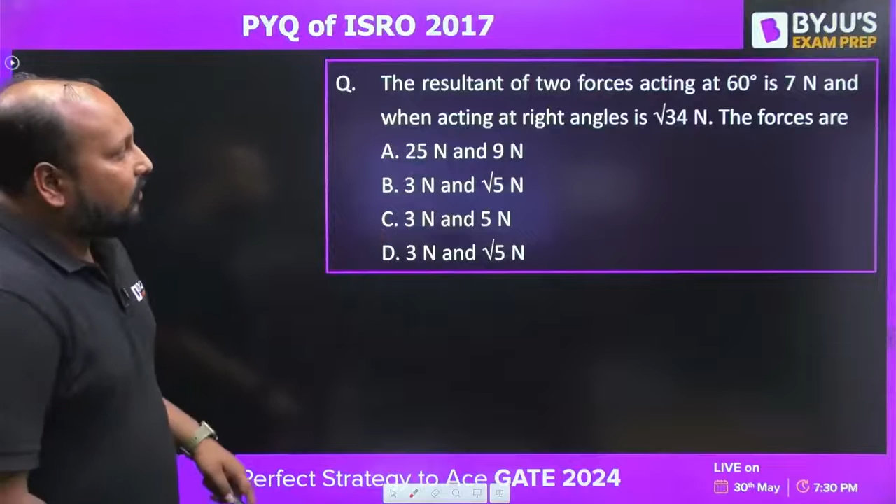Chaliye. So first question on the screen is from the subject of mechanics. Very easy question. The resultant of two forces acting at 60 degrees is 7 Newton. When acting at right angles, it's root 34. Then what are the individual forces? Can you tell me the answer? This kind of question is asked in multiple examinations. That could be GATE, even in the ESE paper also.

It's quite easy. Let us suppose there are two forces P and Q. If they are acting at 60 degrees, we can say P square plus Q square plus PQ will be equal to 49, right? And when they're acting at 90 degrees, P square plus Q square will be equal to 34. So placing this equation over here, we get PQ equal to 49 minus 34, that is 15. We are getting the product of the two forces equal to 15, 3 into 5, so option C is the correct answer.

Yes? Okay, everyone. Is that clear? We are getting option C as the correct answer. I hope this is clear. Chaliye, let's see. Perfect. So next question on the screen. This was a very easy question from mechanics. The next is from industrial engineering.

ABC inventory control focuses on what? Items not readily available, items which consume less money, items which have more demand, or items which consume more money. So can you tell me in the comment section what will be the answer? The ABC analysis from the topic of inventory control.

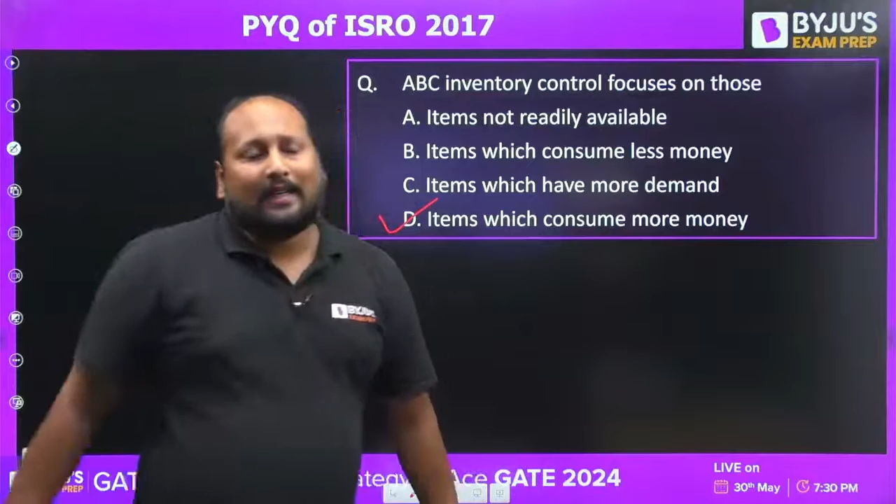For specified inlet and outlet temperatures, for which kind of heat exchanger will the log mean temperature difference be the highest? Tell me in the comment section whether it will be the double pipe parallel flow heat exchanger, the double pipe counter flow heat exchanger, the cross flow heat exchanger, or the multi-pass shell and tube heat exchanger.

Definitely, we know that the delta Tm of counter flow will be the highest. Then we'll have cross flow, then parallel flow. In between we can have the shell and tube also. Always remember, the log mean temperature difference will be highest for the counter flow heat exchanger. Option B is the correct answer.

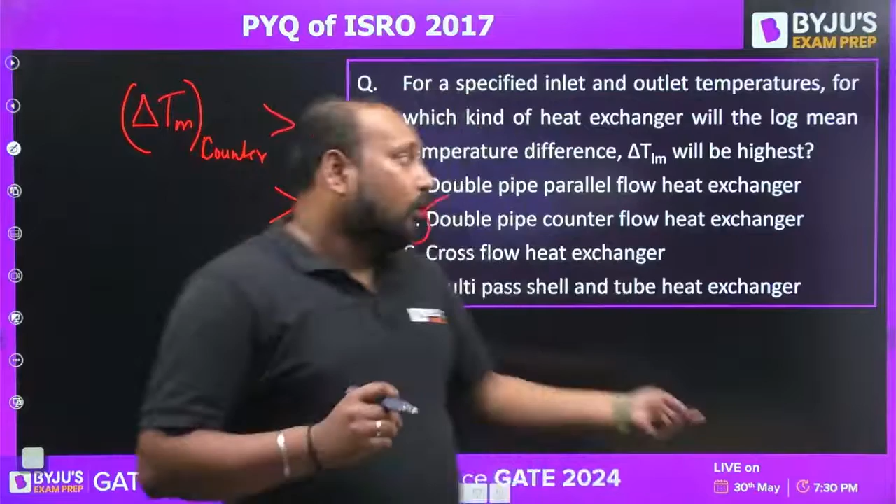Option B, very good, Arnav, very easy, very straightforward. Very easy questions are asked in the ISRO paper, right? You just have to understand the basic concepts. If your concept is strong, you will be able to get very good marks in ISRO. So next question on the screen is from the subject of heat transfer.

What is the Prandtl number for a gas at 27 degrees Celsius and 10 to the power 5 Pascal with a kinematic viscosity equal to 1.8 into 10 power minus 5 meter square per second? Specific heat capacity at constant pressure Cp is given as 700 joule per kg Kelvin and thermal conductivity is 0.02. They're asking the value of Prandtl number.

Now, to calculate the Prandtl number, it's a very simple formulation. We say mu Cp by K, right? Mu Cp by K is the formulation, but here they are not giving the value of dynamic viscosity, they are giving the value of kinematic viscosity. The kinematic viscosity given is 1.8 into 10 to the power minus 5. They have given the value of Cp equal to 700 joule per kg Kelvin, right?

Let me check if we are having any other value with us. Yeah, fine. And we are having the value of K equal to 0.02 watt per meter Kelvin. Okay, so can you tell me how we can calculate the value of your dynamic viscosity? So for that we need to calculate the value of what? Density, right? We have to calculate the value of density. So how we can get the value of density?

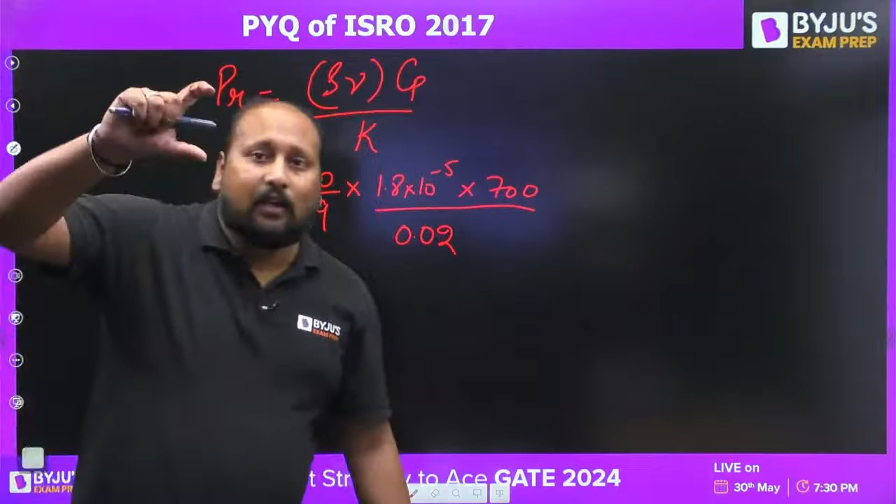Okay, so what is the value of Prandtl number you're getting? Quickly, simple equation, just you have to place it. Are we getting 0.52 or 0.62 or 0.7 or 0.78? The value range is very close, so try to solve the equation and you'll be getting the value to be somewhere around 0.7. So we are talking about something related to air only. Air's Prandtl number is also somewhere around 0.71. So 0.7, that is option C, is the correct answer, right? Clear? Very good, Arnab, very good.

Next question on the screen, I think this you have already solved. Chandra sir has discussed this question already, but this is a combination of two subjects, your RAC and your heat transfer. So you are getting this answer to be 4500 kilojoule per hour. Have you solved this question? It's a very easy question actually. You have to calculate the total heat generated. It will be coming in watt. You have to convert this into kilojoule per hour. Simple question, very easy.

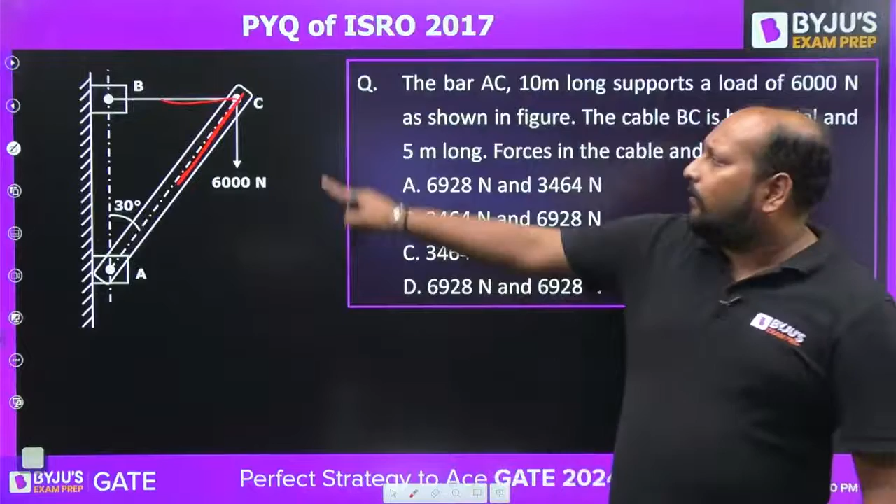So if you take the free body diagram at point C, there's a force acting 6,000 Newton vertically downward. There's a force FAC making an angle of, this is 30, this will be 60, and we'll be having a horizontal force FBC. So can we solve and get the value? Very easy question now. Taking the vertical forces equal to 0, 6000 plus FAC sine 60.

FAC sine 60 equal to 0, right? Cos and sine. So from here I'm getting FAC is equal to minus 6000 by sine 60, that is root 3 by 2. So what's the value we're getting? It will be in negative. Okay, negative means we have assumed this to be tensile, but actually it is not a tensile force. We will be getting a compressive nature force in your AC member.

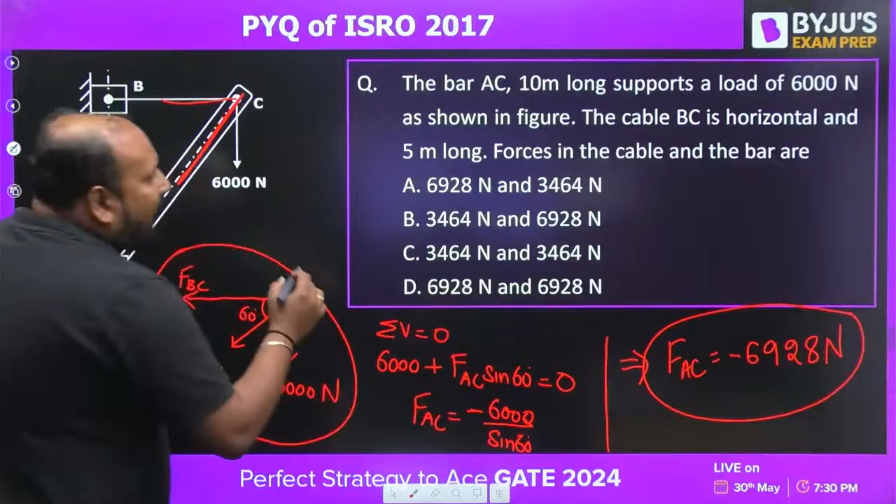So after solving this, FAC is coming out to be minus 6928 Newton. Okay, negative sign is only for the direction. It's basically compressive in nature, right? So we have calculated FAC. So now we can take the horizontal force. So the horizontal force equal to 0.

So we can say FAC cos 60 plus FBC equal to 0. So from here FBC is equal to, cos 60 is 1 by 2, so it is 6928 by 2, that is 3464 Newton. Option B is the correct answer.

Exactly. Very good. Okay. Bar, because AC is your bar. So in the bar we are getting 6928 Newton force, compressive in nature. This is a very easy one. You can complicate this question by introducing the tensile or compressive nature. It's very easy because they are having the distinct magnitude.

They are not talking about the nature of the force, right? It can be compressive in nature or tensile in nature. So you can have this kind of question, but I think this is a very easy question from the truss topic. Okay, so next question on the screen is again from engineering mechanics.

A body of mass 10 kg is initially stationary on a 45-degree inclined plane as shown in the figure. The coefficient of dynamic friction is 0.3. The body slides down the plane and attains a velocity of 20 meters per second. What is the distance traveled by the body along the plane? So very easy. Initially we have an inclined surface.

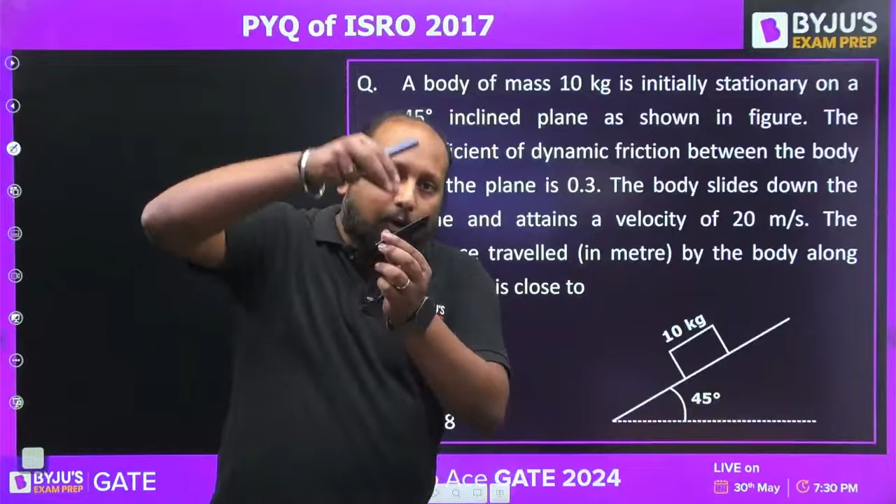I'm dropping a box. Initial velocity is 0. When I drop this box, it will be sliding down, right? If I'm able to calculate the acceleration, I'll get the velocity after traveling. They're asking the distance traveled to attain a velocity of 20 meters per second. U equal to 0, V equal to 20. We need to calculate A first, and from there the displacement.

So let us draw the free body diagram of this inclined body. This body is trying to slide down with an acceleration A. This is the frictional force, this is the normal reaction, this is W cos theta, this is W sine theta. So normal reaction is equal to W cos theta. Along the plane, because the body moves downwards, Newton's second law: net force is equal to mass into acceleration.

So we can say mg sine theta minus mu mg cos theta, because F equals mu into N, is equal to mass into acceleration. From this equation, the acceleration is equal to g times sine theta minus mu cos theta.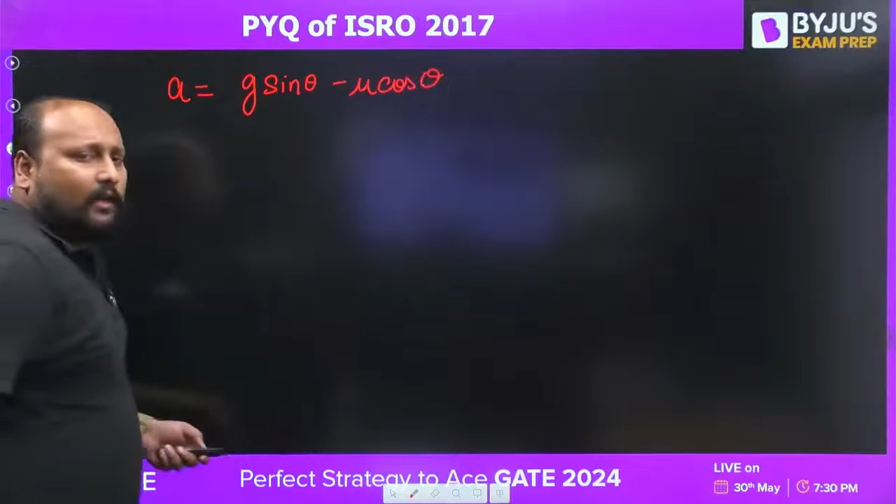I'm not placing the value of theta right now. You can place it at the end if you want. Theta is already given as 45. So it will be g by root 2 minus mu g by root 2. This is the value of acceleration.

So once I have the acceleration, initial velocity is 0, final velocity is 20 meters per second. You need to calculate the displacement. So v square is equal to u square plus 2as. Can you tell me what value of acceleration you are getting? 41 meter is the approximate value.

Okay, what is the value of acceleration? Somewhere around 4.85 meter per second square. u is 0, so s is equal to v square by 2a. So the displacement equals 20 square by 2 into 4.85, which is close to 41 meter. Very good. 41.23, I think. So option C, 41 meter, is the correct answer.

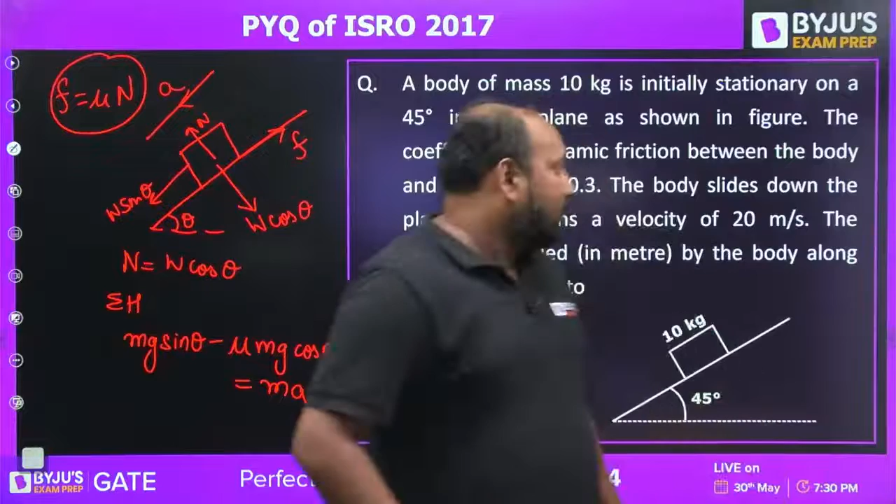41.23, option C is the correct answer. Okay, is this clear? Simple question. You just have to draw the free body analysis and use the friction concept from your subject of engineering mechanics. Okay, let's move to the next problem quickly. In a half-hour slot we have to cover a lot.

What is the approximate reaction moment at the fixed support A for the loaded frame shown below? So we have a loaded frame, and they are asking what the moment about point A is. For the moment about point A, we have to see which forces are acting whose line of action does not pass through point A. We have 200 Newton acting, we have 500 kg, and they say take the diameter of the pulley as 250 mm.

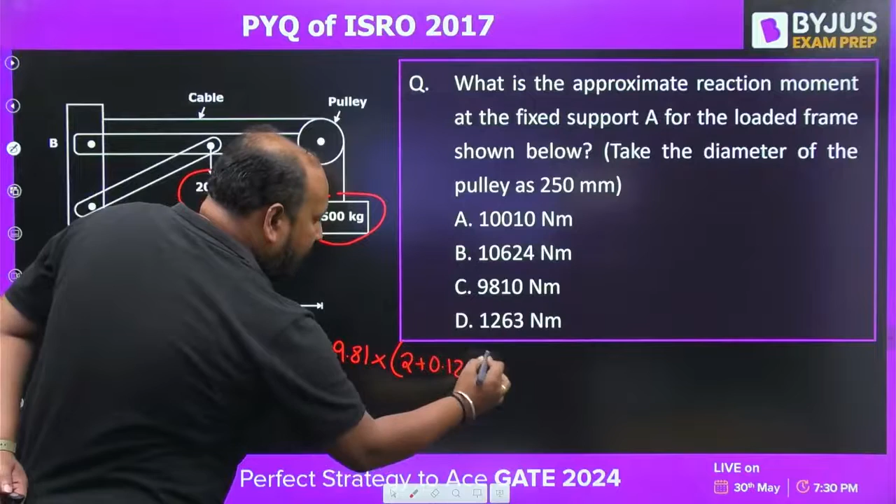The total moment about point A equals 500 into 9.81 into this total distance, which is 1 plus 1, 2, plus 0.125, so 2.125. This creates a clockwise moment. This also creates a clockwise moment: 200 into 1 plus 200 into 1. So solve it. You should get around 10624 Newton meter. Option B is the correct answer.

Simple one-liner question from the concept of moment calculation in engineering mechanics. Okay, next question. Is this clear, everyone? Are you getting the answer for this problem? 10624 Newton meter.

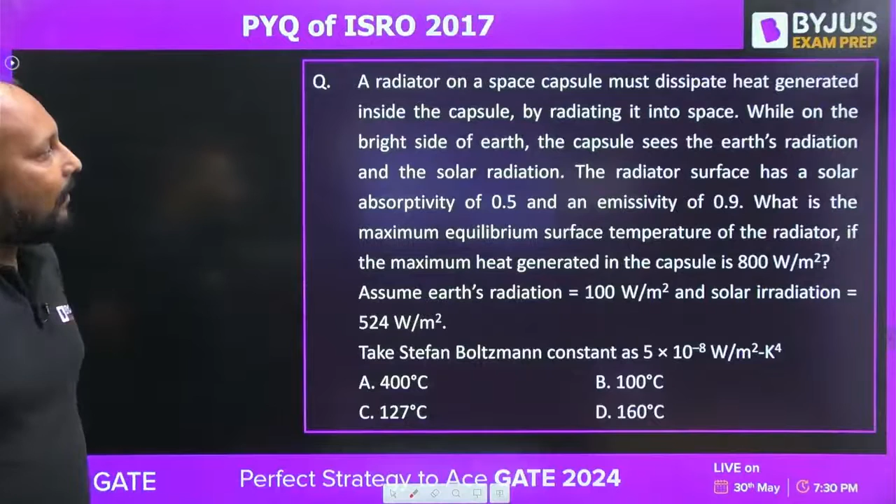It's a question from heat transfer. A radiator on a space capsule must dissipate heat generated inside the capsule by radiating it into space. While on the bright side of the earth, the capsule sees the earth's radiation and solar radiation. The radiator surface has a solar absorptivity of 0.5 and emissivity of 0.9. What is the maximum equilibrium surface temperature of the radiator if the maximum heat generated in the capsule is 800 watt per meter square? Assume earth radiation is 100 watt per meter square and solar radiation is 524 watt per meter square. You have to calculate the surface temperature of the radiator.

It's a very easy question. We have the capsule, basically the radiator; on one side we have the sun, and on the other side the earth's surface. Radiation comes from both sides, so absorption happens from both sides. The absorptivity of the surface is 0.5. Earth sends 100 watt per meter square, solar irradiation is 524, and there's a heat generation of 800 watt per meter square. If you add all three values, you get the total emission. Once I have the total emissive power, I can equate it to emissivity into Stefan-Boltzmann constant into T to the power 4 and get the temperature. So let us do it.

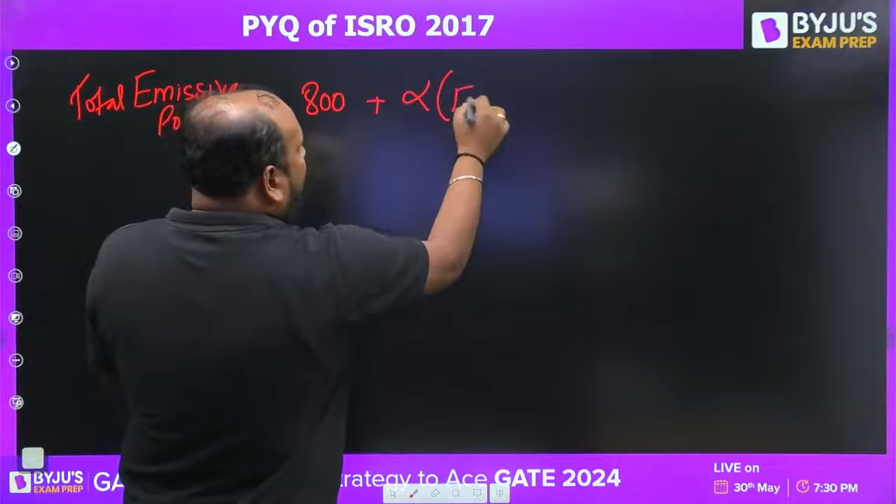What is the total emissive power? The total emissive power equals the energy being generated, that is 800, plus alpha into the energy from the earth's surface plus alpha into the irradiation from the sun. So this is 800 plus absorptivity 0.5 into the earth emission of 100, plus 0.5 into the sun irradiation of 524. From here I get the total emissive power.

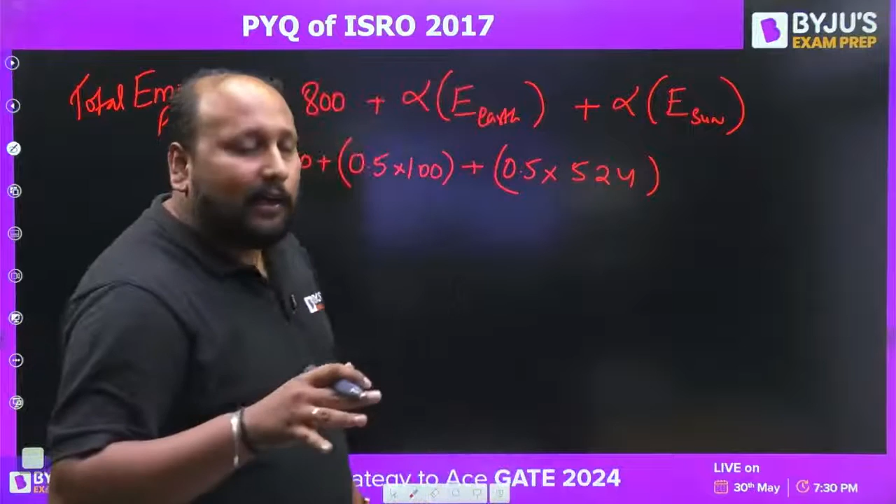Okay, so tell me what's the value you're getting. You will be getting somewhere around 1112 watt per meter square. So whatever energy or emissive power we are having, E is equal to emissivity into sigma T to the power 4. So 1112 is equal to emissivity 0.9 into, I think they have given the value, you have to take 5 into 10 to the power minus 8, T to the power 4. Solve it. You will be getting the value of T.

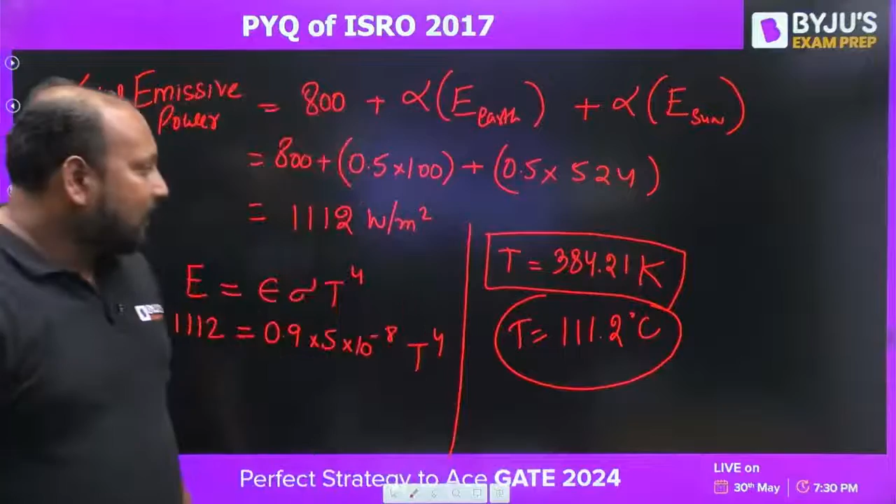What is the value of T you are getting? Whatever value you will be getting, that will be in Kelvin only, but they are asking the question in degree Celsius. So first of all, what's the value of temperature you are getting in Kelvin? It should be near about 384.21 Kelvin. Once I'm getting the temperature of the capsule in Kelvin, convert into degree Celsius, right? So subtract 273, you'll be getting somewhere around 111.2 degrees Celsius. But if you try to see the options, we are not getting any exact values.

Now, actually in ISRO, it is seen multiple times that you can get questions like this where none of the options are matching. So normally they are giving the grace marks, or they remove that question from the entire set. Like if you're having 80 questions and there are 3 to 4 questions like this, they will be eliminating those and calculating from the rest of the marks. So over here, for a safer side, we can mark option B because that is the closest answer. Option B, 100 degrees Celsius.

Okay. 127, that is also a closer one, I think. Actually, you are getting 127 answer. Please check, you will be getting 111.2. Okay. Chali.

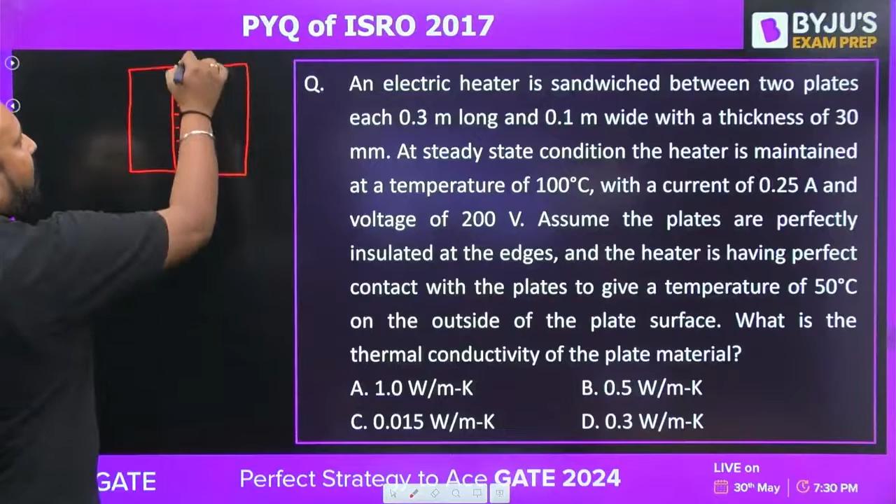Fine. So over here, let us try to draw. We are having two plates, and in between the two plates there is a heater sandwiched, maintained at a temperature of 100 degrees Celsius. On both sides, the outside temperature of the plates is given as 50 degrees Celsius. And the heater is connected with a 200 volt source and 0.25 ampere. So can we say the total heat is equal to V into I, 200 into 0.25, right? So this will be 50 watt.

If 50 watt is the total heat generated, can we say half will go to the left side and half to the right side? The thickness is given as 30 mm. So from here, Q is equal to K into A into delta T by thickness. So this is 25, because we'll have 25 watt on the left side and 25 watt on the right side, equally distributed, right? We need to calculate the area: 0.3 and 0.1, the length and width, so 0.3 into 0.1. Temperature difference is 100 minus 50, that is 50, and the thickness is 30 mm, that is 0.03.

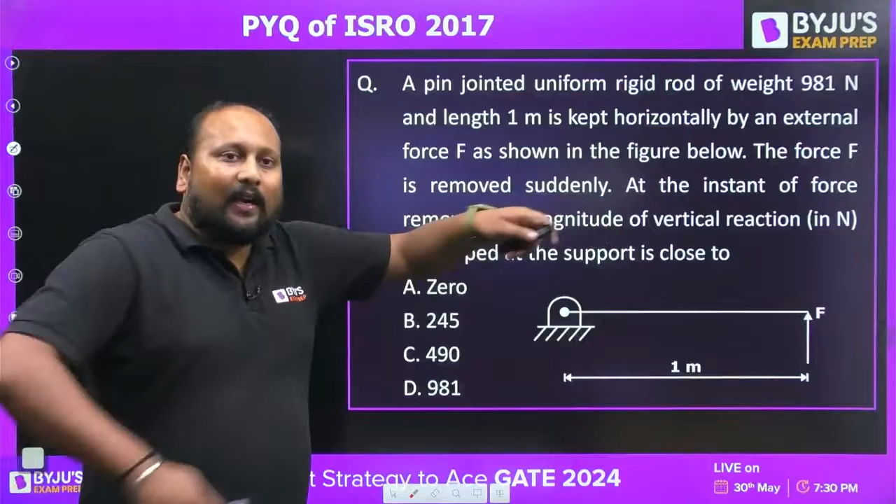As we are removing this F suddenly, at that point of time the body will not be in equilibrium. So they are asking, at the instant of force removal, what will be the magnitude of the vertical reaction?

Let us suppose this is point A, so we'll be having this as RA. And the weight definitely will be having a weight. Let's say this is point B, and this will be the weight of the rod, that is W, which is 981. So as soon as we remove this, due to this weight, we'll be having an angular acceleration. So can we say the torque created about point A is equal to the moment of inertia about point A into alpha, right?

Which force is responsible about this point, the weight is responsible, that is 981 into this distance 0.5, is equal to the moment of inertia about this rod at one end into alpha. It will simply be equal to ml square by 3 into alpha. So from here we get alpha is equal to 981 into 0.5 into 3, divided by m into L value.

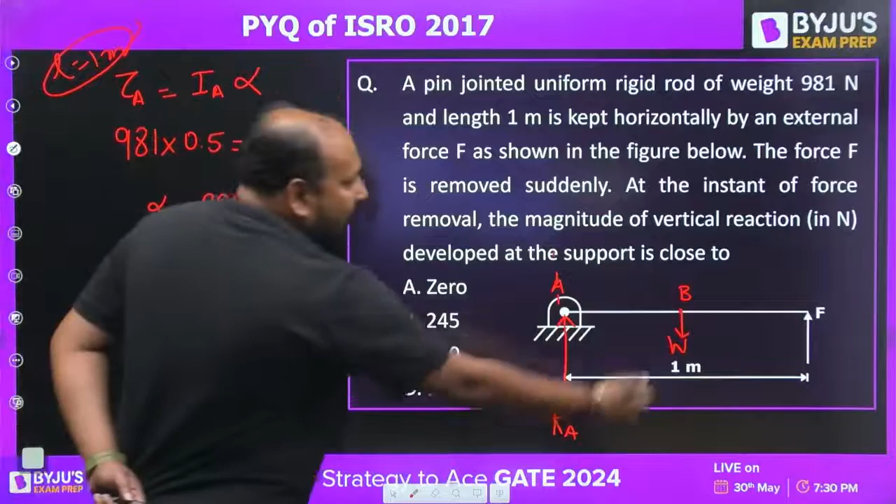I think it's 1, so let us take it as that only, L is equal to 1 meter. Now if I do the same analysis about this axis, the torque about point A equals the torque about point B, that is IB into alpha. So this is equal to ml square by 12 into alpha, value is 981 into 0.5 into 3 divided by m, and this will be equal to RV into 0.5.

So m cancelled out, L is 1, 0.5 cancelled out. So RV is simply equal to 981 into 3 by 12, that is around 245 Newton. Option B is the correct answer, 245 Newton. Very easy, a simple straightforward question from the concept of engineering mechanics.